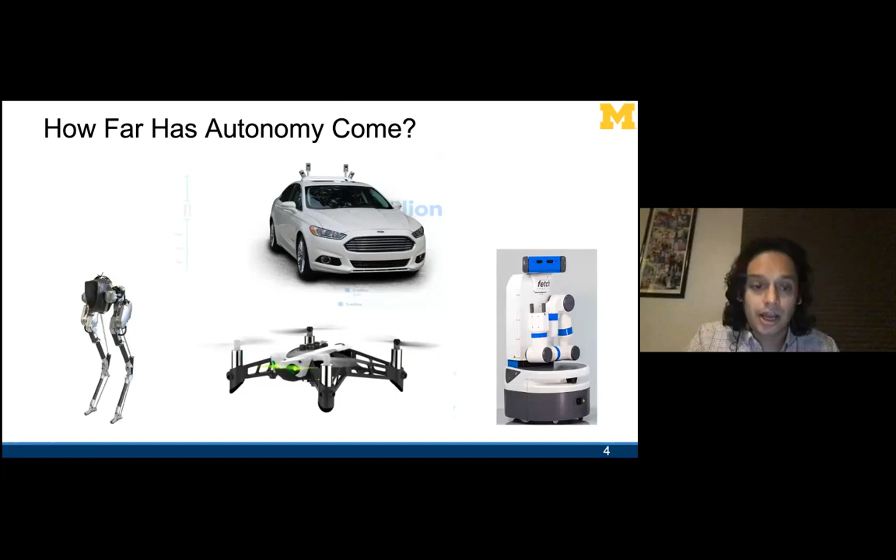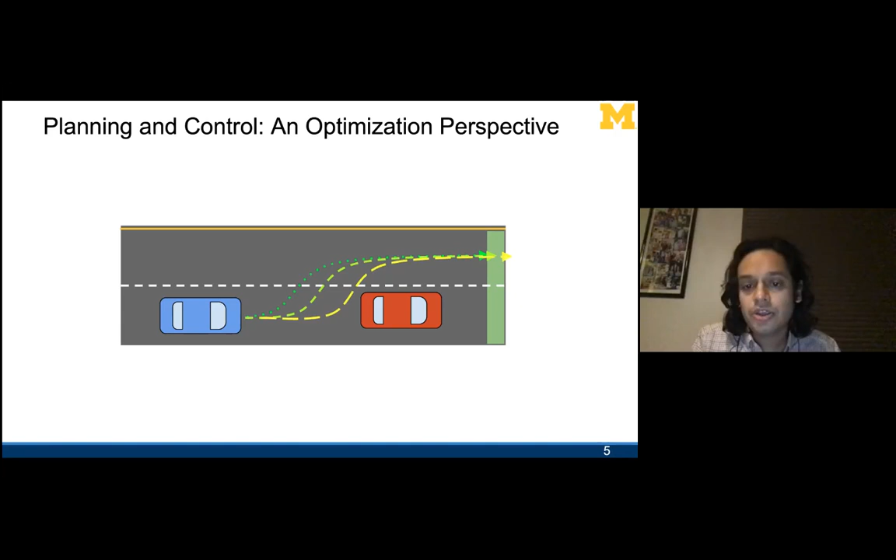The problem is that in order to make them work quickly, we tend to discretize time pretty coarsely. The question always is, if the coarseness is refined and we make it a finer and finer trajectory, does it get actually closer to something that is actually unsafe? The question then is, there's sort of a balance between getting something that is able to operate in real time and something that is actually provably safe.

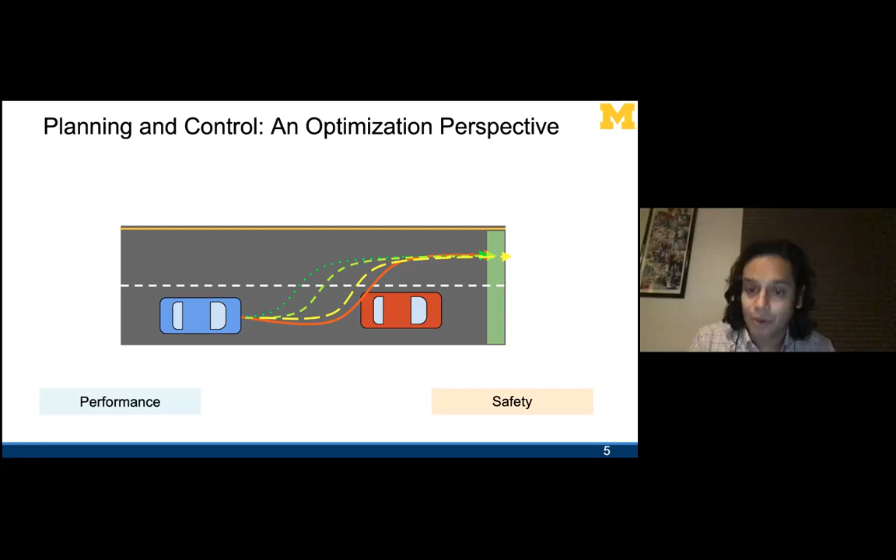The question here is, how do we balance between these two types of problems: getting something that can operate quickly, and at the same time, something that is validated to operate correctly. The thing I'm really interested in is figuring out the right balance between these two.

One way to think about that is by looking at model fidelity, representing the problem you care about in a nice way. This can be a challenge using typical techniques where I have a nonlinear dynamical system and write down a nonlinear program. That program may have more and more decision variables, representing safety better and better, but that will slow down the performance of the system.

So instead, my group has been looking at techniques relying on infinite dimensional representations of this problem. The really cool thing is that infinite dimensional representation allows us to apply nice tools from convex optimization to balance between performance and safety by representing different types of model fidelity in interesting ways.

In the first portion of the talk, I should mention these infinite dimensional representations allow us to go from nonlinear models to linear ones. I'll talk about a technique my students developed called Reachability-based Trajectory Design. It's a certain type of lift of nonlinear models into a linear one, where we generate representations of these linear models that are outer approximations to the nonlinear model's behavior.

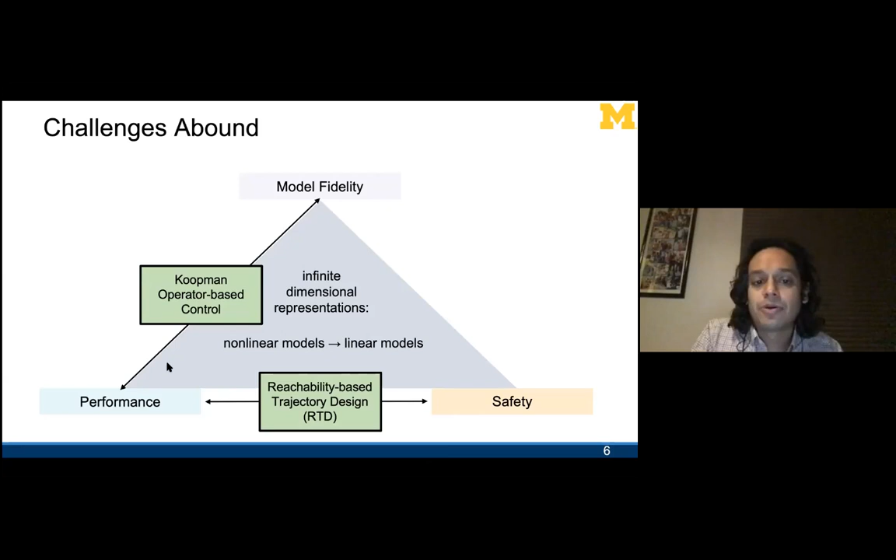That outer approximation allows us to say something about safety at runtime. In the second portion, I'll talk about doing data-driven optimization to generate something that looks like a Koopman operator representation—again a linear representation of a nonlinear dynamical system. The impressive thing is that nonlinear model, represented in a linear basis, allows us to apply traditional control techniques like model predictive control to real-time control of a soft robot.

I may not get to this part, I have a lot of slides. I apologize in advance, but I'll try to provide a high-level introduction to both of these topics.

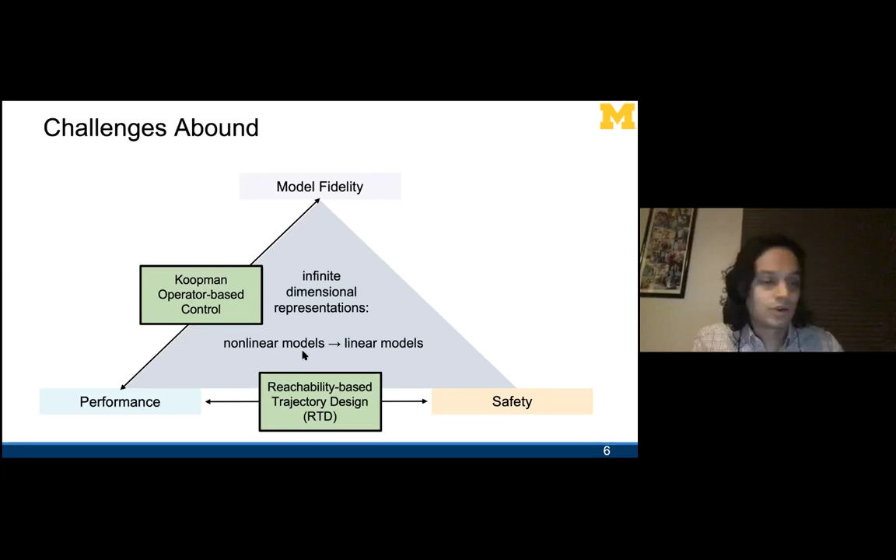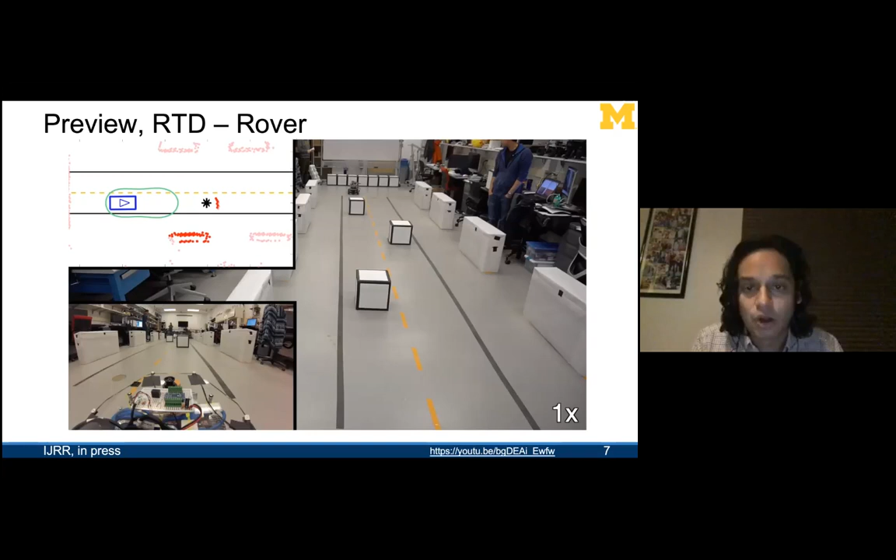We've applied this type of planning to a bunch of different systems, and I'm going to show you lots of videos of this working. This is RTD, Reachability-based Trajectory Design, applied on a rover. This is my lab, from when we used to have a lab.

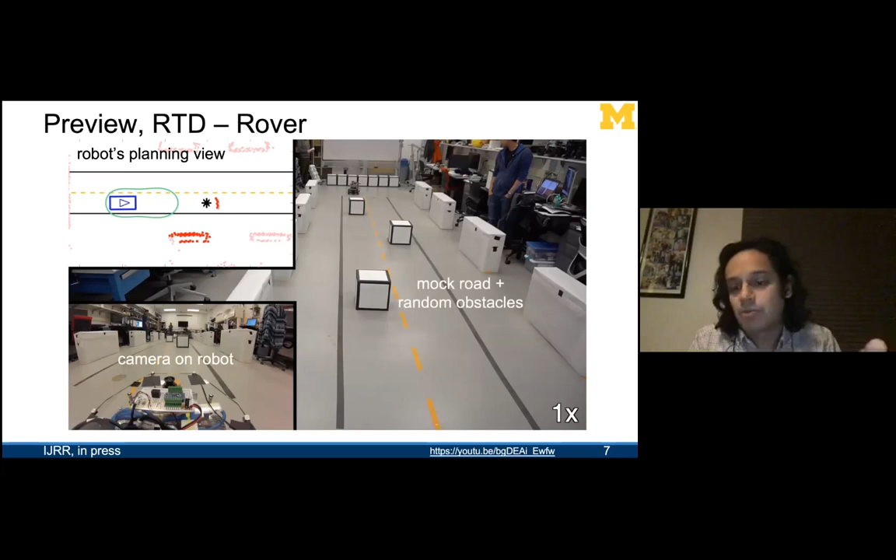These videos are always going to look sort of the same, so I'll walk through it carefully. We have this robot planning view, which you can imagine in Gazebo or MATLAB. We have a camera on the robot, a random world on the right-hand side, and a high-level planner generating waypoints. We have obstacles drawn in red, and our robot drawn in blue.

We'll have this control parameterized reachable set. I'm drawing a slice of the reachable set, meaning a particular trajectory or control I've applied and the corresponding reachable set of the system. Basically, the car selects different types of reachable sets it has pre-computed in order to do planning.

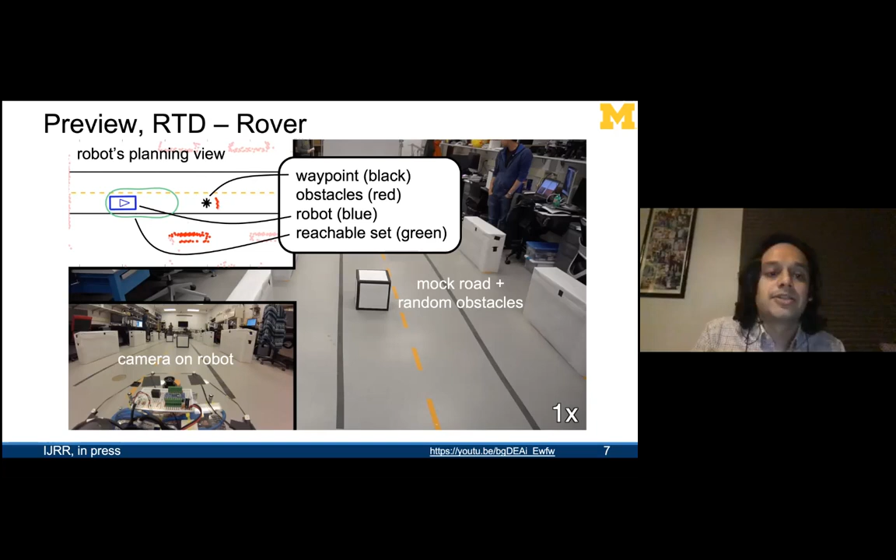This is actually drawn from a continuous space rather than a discrete space. So this is what it looks like now moving. This paper is now in IJRR—I think it was just published this year. You can find a video that I've shown here; the link will always be down here on the right-hand side if you want to take a look.

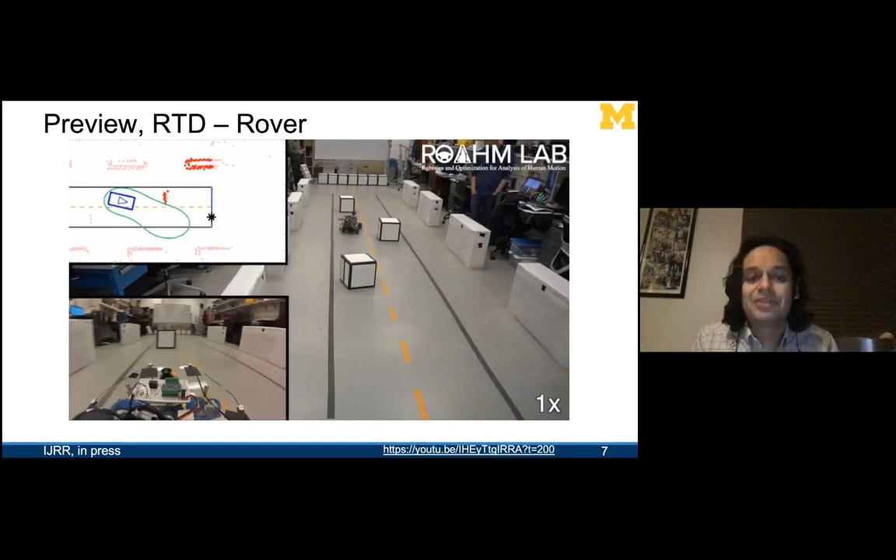They'll try to randomize it. All the compute is done onboard and it's able to operate safely. This tool is a simple example, but we've actually been able to apply it on a more realistic system.

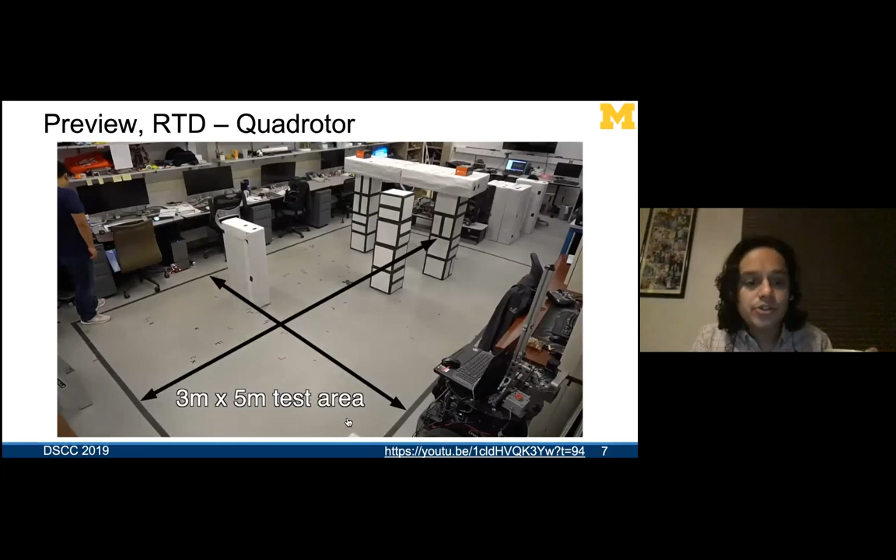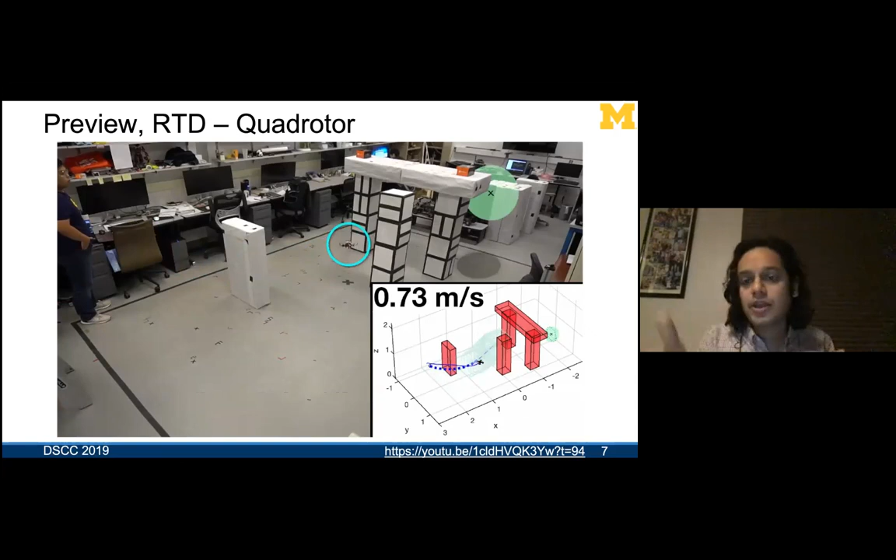Actually, that's not true. We've been able to extend it to quad rotors. This is another paper presented at DSCC, with the YouTube link down here. It's from our lab. It can't go very fast, but we have this quad rotor, and it's doing all the compute on board, able to get through complex environments. I'll jump ahead, and you'll see it going through more and more complex environments, dealing with some aerodynamic effects.

So it is truly dealing with the fact that I may have a nonlinear model. And you're going to see that it's able to operate with dynamic obstacles as well. We have a virtual obstacle here that's not depicted in the real world, and then a moving obstacle depicted with this rover.

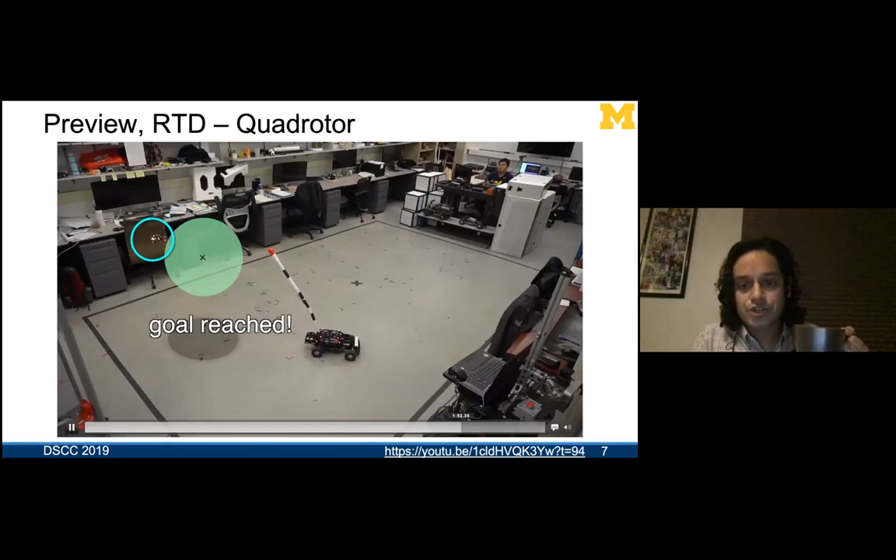All the compute is happening in real time. We're able to do more interesting things here with even people moving around in front of it. All the planning, all the reachable set construction in terms of selection of the reachable sets, is happening at runtime. You're going to see some fun stuff going on here.

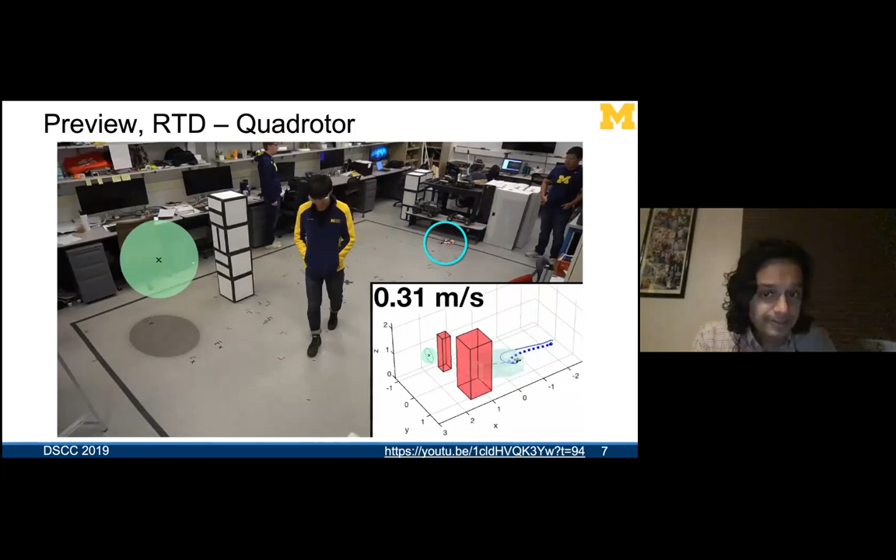We've been able to apply this to even more complex systems, like this manipulation robot. This is a 7DOF robot, so more or less a 14-dimensional nonlinear state space model. And again, it's doing all the planning at runtime.

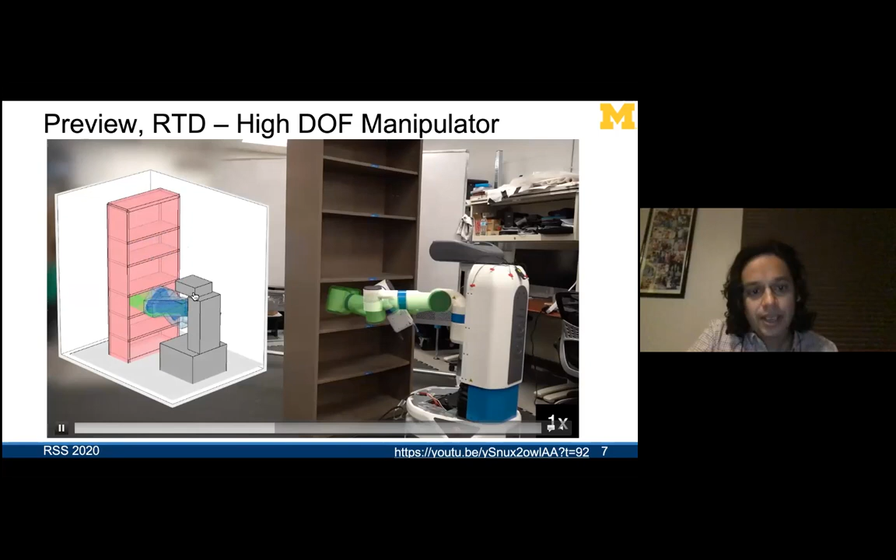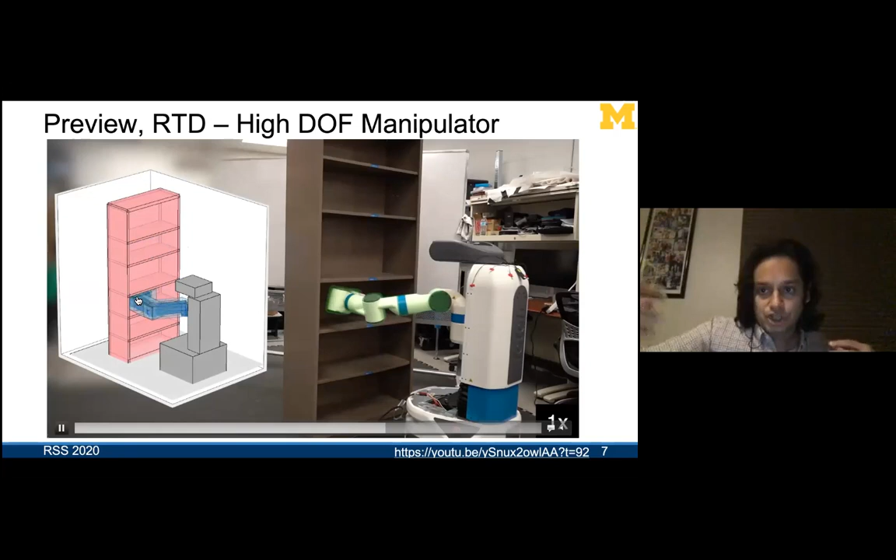The predictions here are drawing a reachable set, the volumetric box. Earlier on, the waypoints were drawn as black stars along the way. Now the waypoints are generated by an RRT, drawn as a black manipulator configuration description, which you can see up here as well. Then we have dynamic obstacles appearing, and it's doing all the planning, everything, at runtime.

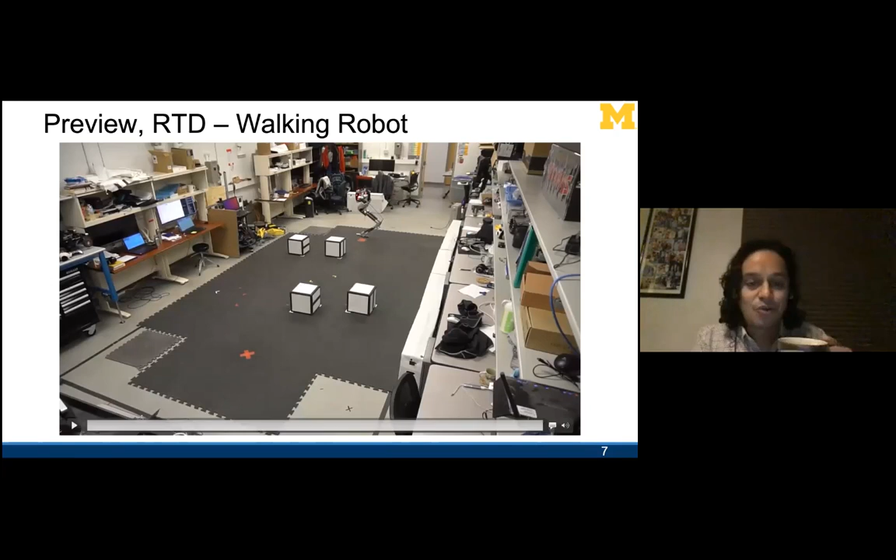We've actually been able to extend it to even more complicated systems, and this is Cassie. In this instance, we're constructing an even more complicated reachable set, and it's able to do planning at this point. This is right around when COVID was about to hit the United States, so this is where we got to before our lab had to shut down.

That's going to be the first portion of my talk. The second portion, I'll hopefully talk about Koopman-based control. Initial versions of this paper were presented at RSS and then TRO, and there's an extension that's up on arXiv at the moment.

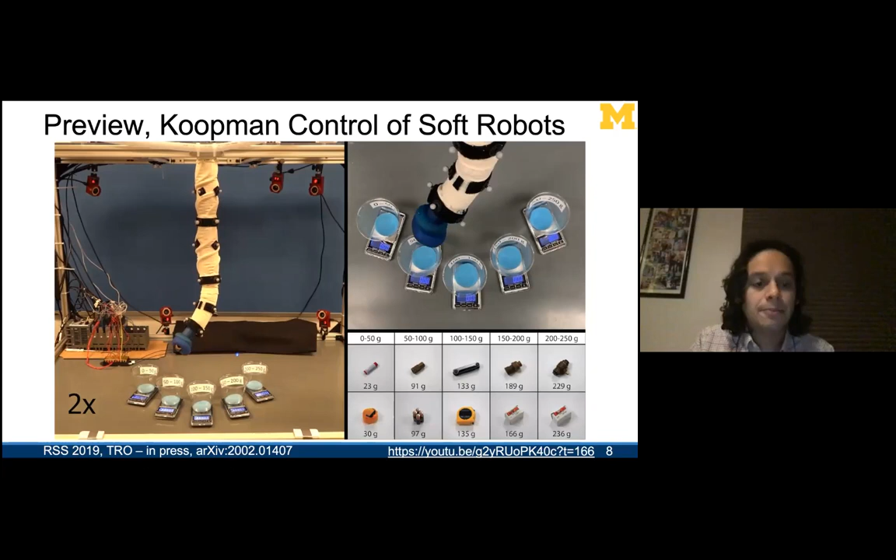What we're able to do is use a Koopman-based model, another kind of lifting technique, to basically do manipulation. This is an example of us building a data-driven model. It's able to pick up an object that's handed to it, figure out the weight of the object at the end effector, and place it into the right bin. All of this is happening in real time, figuring it all out on its own.

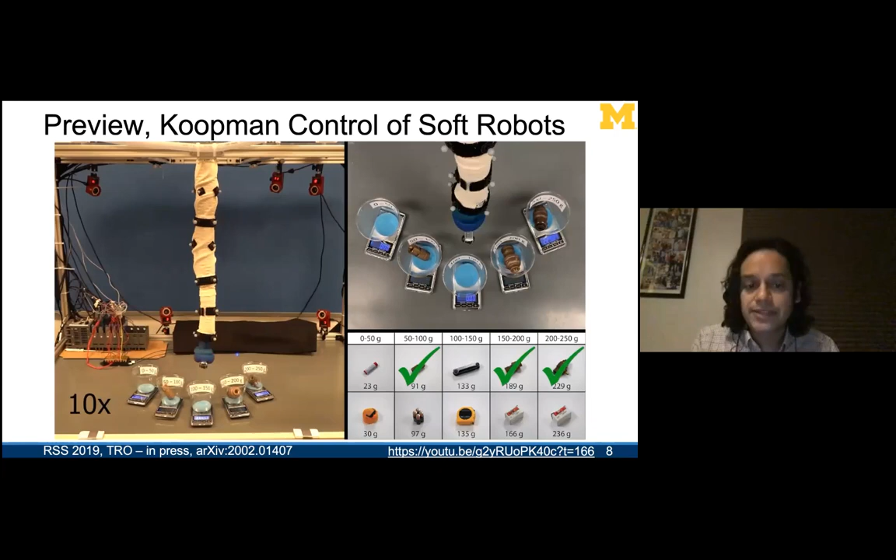These systems are notoriously difficult to model and subsequently difficult to control. But this lifting-based technique allows the application of linear-based control techniques, which lets us do quite a bit in terms of controlling these systems using a data-driven perspective.

I see a question. Let me take a quick look at that. Oh, never mind, I thought it was Jana's slide comment.

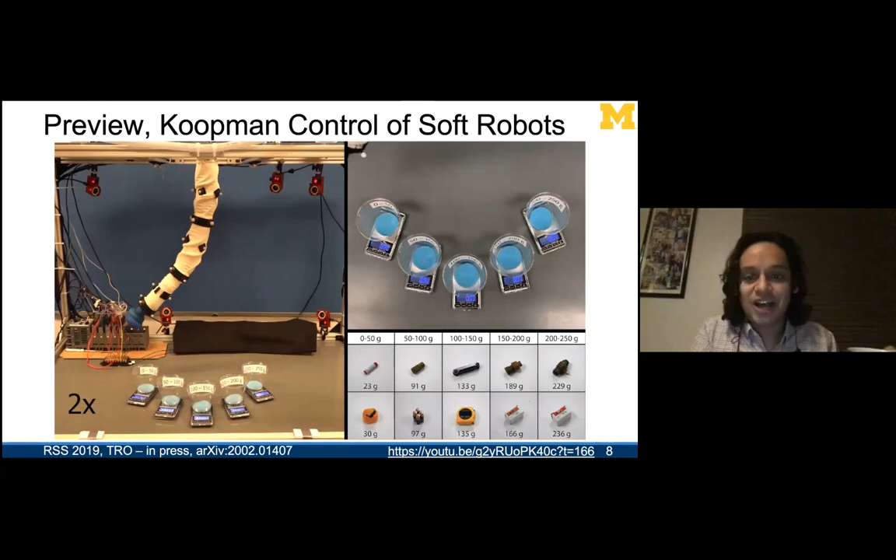Okay, great, so that's going to be my talk, more or less. I'm going to talk about reachability-based trajectory design for provably safe planning, and then I'll talk about Koopman-based modeling and real-time control.

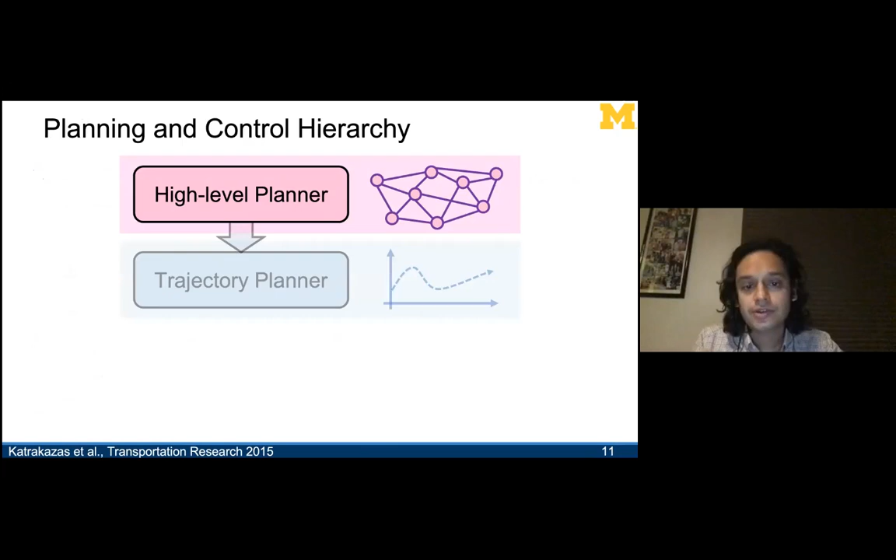Subsequently, that information is passed to a trajectory planner. What that trajectory planner tries to do is execute those turn-by-turn instructions. So what that means is, I may get information to go down to the end of the road, stop, and then make a right. How do I get down to the end of the road and then make that right? The trajectory planner is essentially deciding how to do that.

And then finally, I have a tracking controller that is trying to follow the trajectory that has been designed in the previous stage. This tracking controller has to manage the powertrain dynamics and a lot of other complications.

While doing trajectory planning, if I have the entire powertrain model in my hand, it turns out to be really challenging to do real-time planning. So you make a decision to abstract the model at some level and use a simplified model to generate a trajectory, and then cross your fingers and hope that a tracking controller can actually follow that trajectory that has been planned.

So for anyone working in the verification or validation community, that seems really problematic. The question is, how do we actually make some strong guarantees about the trajectory planner or the tracking controller behaving as desired?

Many people have thought about bringing in safety at this tracking controller layer, and that's a good idea. In fact, lots of folks have worked on that. So in my group, we've divided them into different bins.

The first bin of approaches to doing this validation of path planning are methods called check methods. What they try to do is look at some pre-computed trajectory and validate that that particular trajectory can be realized by the system in a safe way. There are a lot of methods to do this, and I'm not going to do a great job of covering all of them. If you're interested, please follow up with me, I can share millions of references about this.

But one particularly beautiful class of methods are these Zonotope methods by Chris's PhD advisor, Matthias Althoff. His group has done a really beautiful job of developing these methods to do collision checks at real time. These methods work by relying on linearizations of a nonlinear dynamical system and generating zonotopes around those linearized representations. That zonotope describes what can happen for this nonlinear system when it's treated as a linear system plus disturbance. These methods work really well when the system looks really linear.

So that's basically the trade that they make: if I can write down the dynamics as even a linear time varying system plus a small amount of disturbance, these methods shine.

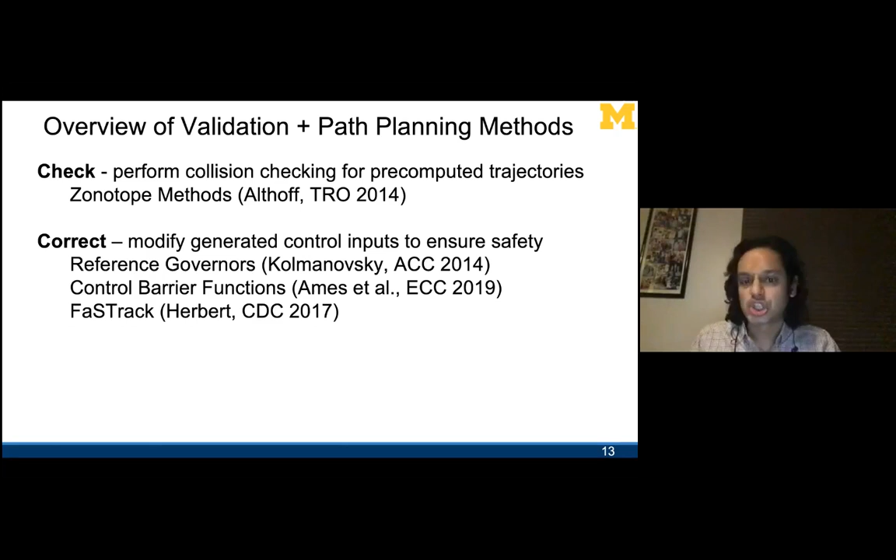So others have thought about bringing in safety at a slightly higher level, at this trajectory planner level. And in fact, there's been a bunch of different methods thinking about this. I'll highlight two of them.

One are these funnel library approaches, developed by Ani Majumdar and Russ Tedrake. So when I was a postdoc at MIT, Ani was working on this stuff. It's really cool. Basically, what they end up doing is selecting a finite number of possible trajectories and generating sums of squares representations for reachable sets around these finite pre-computed trajectories.

What we're going to do is basically generate a continuum of trajectories. And essentially what I'm going to show is how you can scale this method up to dealing with lots of more complicated high-dimensional systems, but also how do you deal with obstacle representations and actually make really strong guarantees about safety.

So that's the delta here between the funnel library approach, where they're really just focusing on ensuring safety at discrete time steps and using a discrete action space, and here we're going to focus on safety over all of time, so over a continuous amount of time. And we're actually going to have a continuous space of possible things that the planner is allowed to select from at runtime.

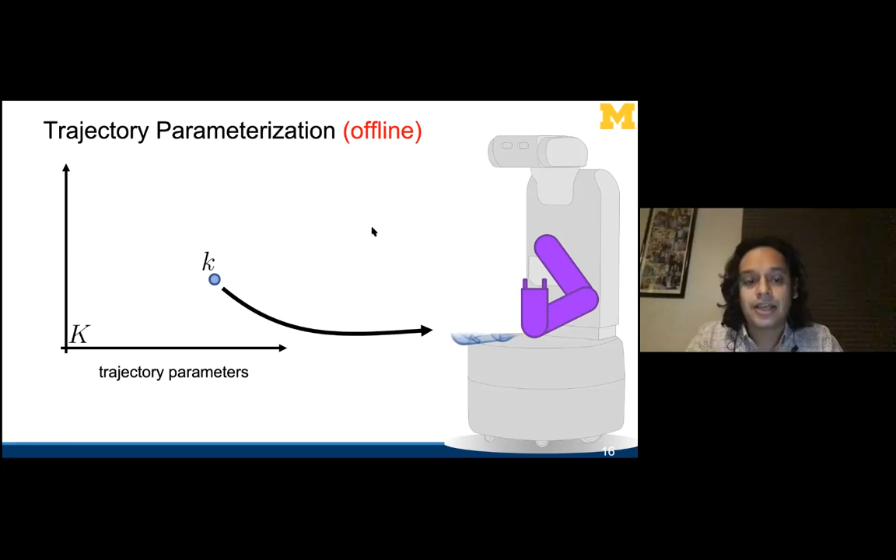Offline, what's going to end up happening is I'm going to select a trajectory parameter space. Each trajectory parameter is going to correspond to a behavior for the robot. And in fact, what I'm going to do offline is generate a reachable set for the system, and that's going to correspond to some sort of volume in the workspace of the robot.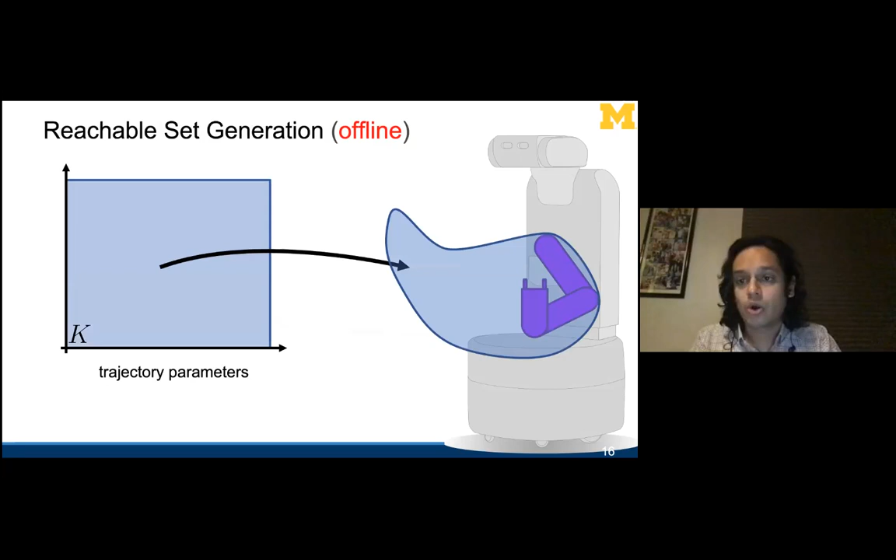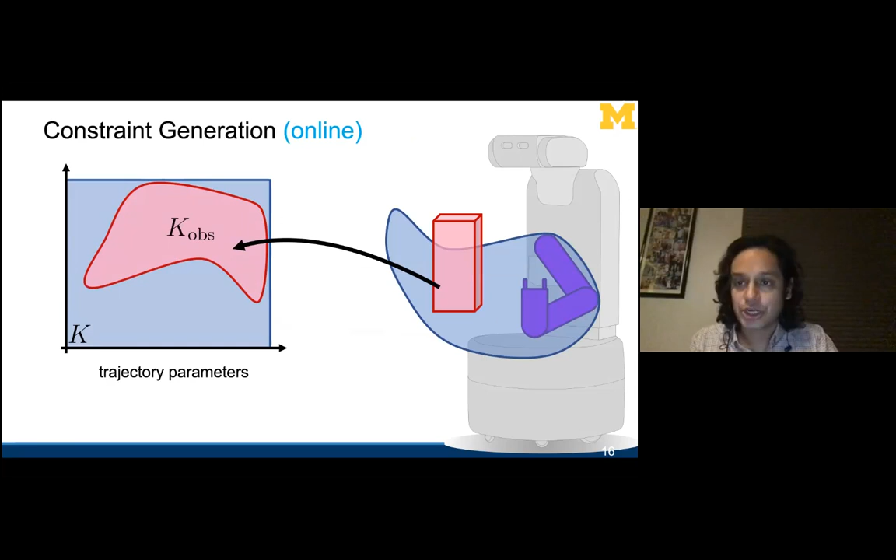And then what I'm going to have at runtime is basically constraints that are going to appear that are only known at runtime, and that's going to correspond to a set of unsafe trajectory parameters, right? And in fact, what I'm going to do is show that I can write down a trajectory optimization problem.

So suppose I have some sort of desired configuration I'd like the robot to get to. Well, that may correspond to a particular target trajectory parameter. Well, I can write that down as some sort of optimization problem here on the left-hand side.

And it's going to turn out that that optimization problem is fairly easy to write down with really nice constraint representations and really nice cost representation, which is going to allow for the application of really nice gradient descent methods that I'm going to be able to run really quickly at runtime. So that's basically what it's going to look like.

And then I can do optimization in whatever way I care to do it, and basically discover maybe the closest possible solution that I can find at a particular instance. But because of the way that I'm representing obstacles and the way that I'm representing this reachable set, I'm going to be able to show that any feasible solution to this optimization problem is actually safe. And because of the way I'm going to parameterize trajectories, I can always guarantee that I'll find a feasible solution.

Okay, so that's going to be the story I'll tell. The cool thing, at least, is that we have this sort of high degree reachability for a continuum and for high degree of freedom robots.

I'm going to show you how to represent obstacles to really ensure that you're generating something that is safe. That's going to be sort of at a high level what we're going to do. I'll walk through the theory here, and then I'll walk through the implementation.

So how's this going to work? Let's write down a model for the manipulator. Again, I'm focusing on manipulators here. The technique can extend, but I'm going to have a multi-dimensional robot here. I'm going to let QI denote the joint trajectory of a particular joint I.

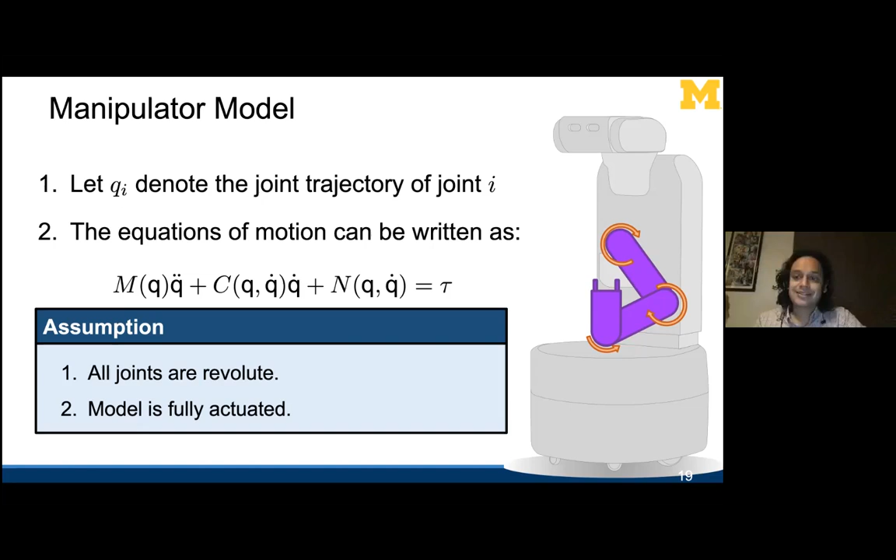Okay, so why do I care about this full actuation for this particular talk? Well, in fact, if the model is fully actuated and I can write down the equations of motion, well, if I assume that I don't have any actuation constraints, well, what I can do is, as long as I have a desired trajectory that matches up with my current trajectory or current joint velocity and joint position at time 0, well, I can track that desired trajectory perfectly as long as I use something like feedback linearization if my model is fully actuated, and I can write down the equations of motion.

So again, if I have a desired trajectory and that initial velocity and initial position of that desired trajectory match up with my current position and current velocity just at time 0, well, then I can track that trajectory perfectly as long as I assume that my model is fully actuated, as long as I assume that I have no actuation constraints and I have a model of the system.

Okay, those are 3 really serious assumptions, but we'll start there, and then I'll show you by the end of the talk how to extend or remove most of these except sort of this fully actuated requirement.

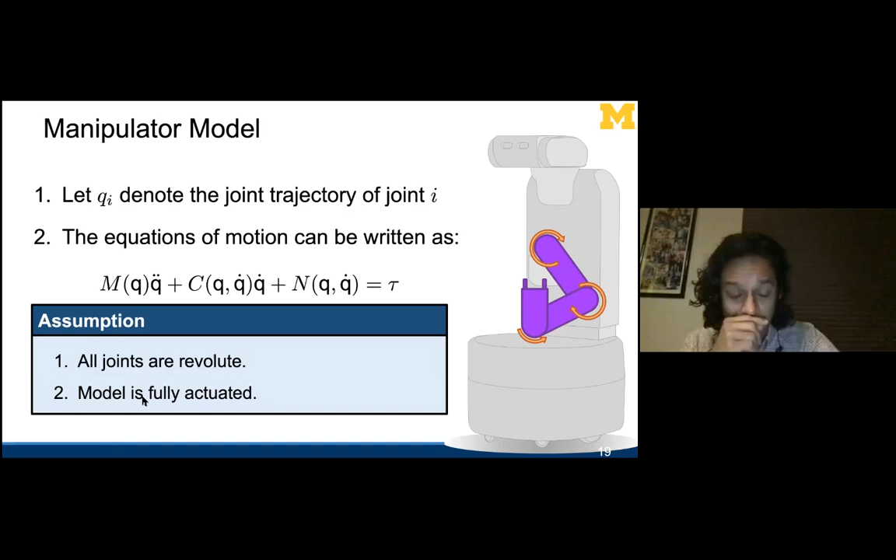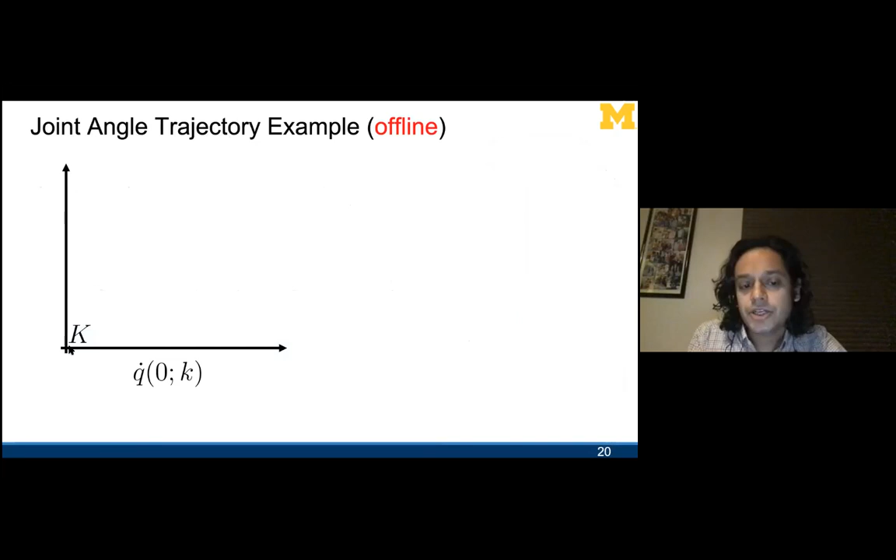So what we're going to do first is parameterize trajectories, as I mentioned. I'm going to give you an example of how this trajectory parameterization is going to look. So the way that it's going to work is, I have this trajectory parameter space K. I'm going to assume, and this is an assumption, that one of the trajectory parameters is going to correspond to the initial velocity of my system. And then the rest of the trajectory parameters can correspond to anything.

I'm going to select something that looks like Q double dot desired. In fact, it could be anything that you wanted it to be. But this particular choice of trajectory parameter is going to be required, and we'll see why in a moment.

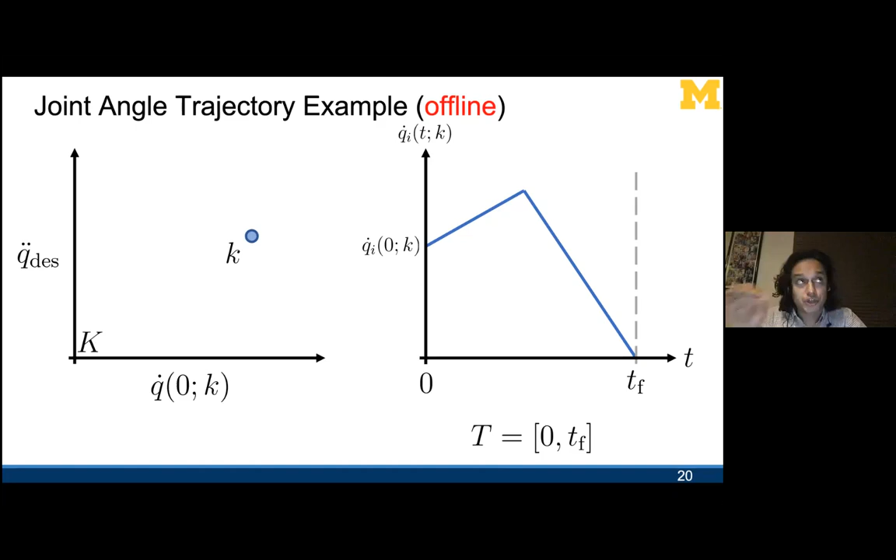Well, under this selection, what that would mean is that if I had a particular trajectory parameter, I'm going to first start off here, and this is going to be sort of the y-intercept of my trajectory parameterization, and then the velocity could be, or the acceleration could be something that looks like this. Well, what I'm going to assume is that this is defined over some tau plan or t plan, and then eventually my trajectory parameterization is going to bring my system to a stop.

Okay, so what I'm going to assume is that my robot must find a new plan within T plan, and otherwise it continues executing its previous plan, and my previous plan is always going to bring my system to a stop. And the other assumption is that this Q dot 0 is going to be one of my trajectory parameters, and we'll see why in a moment.

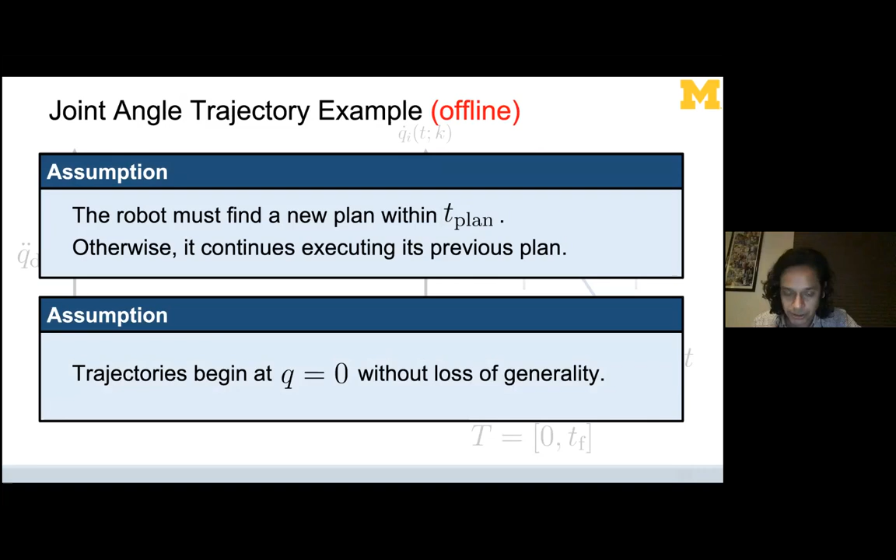And for the sake of simplicity, I'm going to assume that my trajectories always begin at q equals 0. I can always rotate my system around to make that assumption satisfied without any difficulty. So what I'm going to do is I'm going to apply a lift. As I mentioned, we're going to use infinite dimensional optimization. This is going to be the first example of a lift that I'm going to apply.

The lift is basically this: I'm going to take my trajectory parameter, and instead of just plotting my trajectory parameters here, I'm going to plot the sine and cosine of my trajectory over time. So if I give you a particular trajectory parameter on the left-hand side, taking the sine and cosine of that corresponds to some sort of trajectory on the circle on the right-hand side.

So why is that useful? Well, now if I give you a set of possible trajectory parameters, that corresponds to a set of possible trajectories on this circle for this particular joint. And what I'm going to try to do is compute the reachable set for this system.

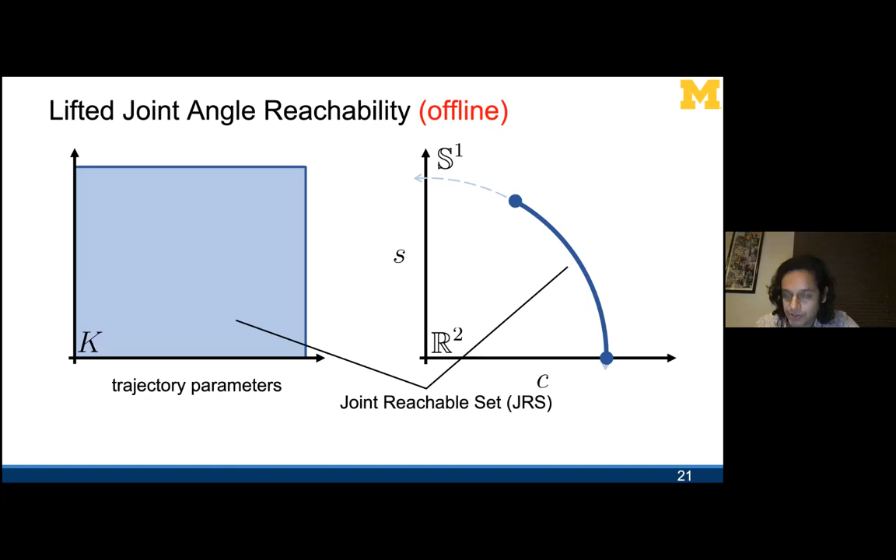I'm going to call this sine and cosine just S and C here, so I don't have to carry around too many variables. I'm going to compute a joint reachable set for this system, denoted with the script J, belonging to some subset of R2 cross K. Technically this should be on S1, but I'll pretend for a moment that S1 is a subset of R2, as depicted on the right-hand side.

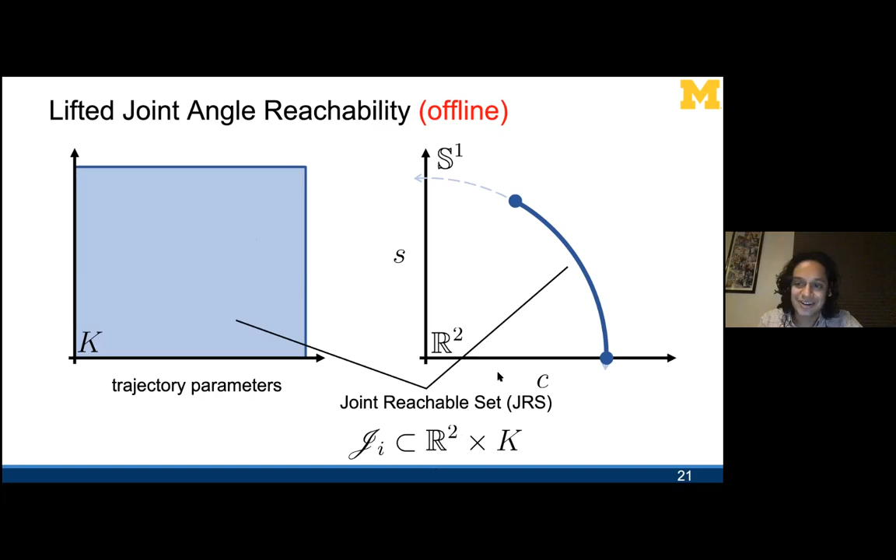So I'm going to try to compute this joint reachable set, defined as there existing a T such that I can write down this equation, and it satisfies the dynamics I had written down on the previous slide. The interesting thing is if I look at the dynamics of the system, I can write it down as a linear time varying system. Because it's a linear time varying system, I get lots of interesting reachable set tools that allow me to compute this joint reachable set in a really accurate way. We'll talk about that in the implementation section.

This lift, which looks mild and not very complicated, is allowing me to essentially extract a linear time varying system representation for the trajectory parameters in this C, S, and K space. In that instance, I'll be able to apply really nice tools to compute the reachable set of the system without any problems associated with nonlinear dynamics. So by translating the dynamics from the Q space into this cosine and sine space, I've applied a really simple nonlinear lifting technique, and that technique is allowing me to do really nice things with respect to reachable set computation.

So how am I going to use that? That works for one joint. How do I use that at runtime for multiple joints? The idea is simple: I'm going to compute a reachable set for each of the joints separately, and then somehow compose them together at runtime.

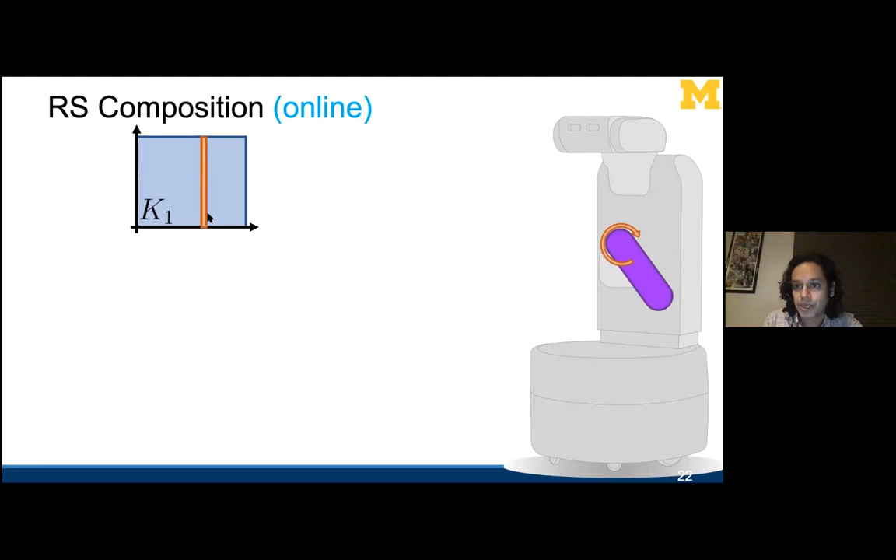In order for that to work, I'm going to do an operation I'll call slicing, which is I'm going to take my system at this instance in time and take its joint velocity at this instance in time, and plug that in. What that's going to do is select a slice of the trajectory parameter space, corresponding to a reachable set along this slice of the system.

Then I'm going to take the next joint of the system and do the same operation, selecting a subset of the trajectory parameter space corresponding to the current joint velocity. That generates a reachable set for the system as well. I'll do the same thing for the next joint. What I'll do at runtime is compose those slices together by doing some sort of multiplication on the reachable set.

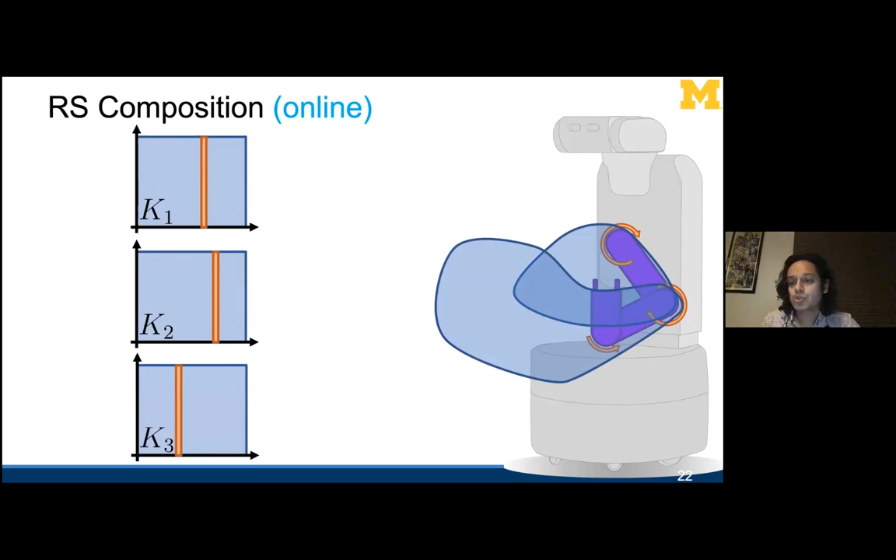This operation is going to be called slicing, where I'm basically slicing in the current velocity at time 0 of my planning. Then I'm going to stack the reachable sets together, and I'll call that operation stacking. The question is, how do I do slicing and stacking in a way that allows me to do nice things with respect to reachable set computation?

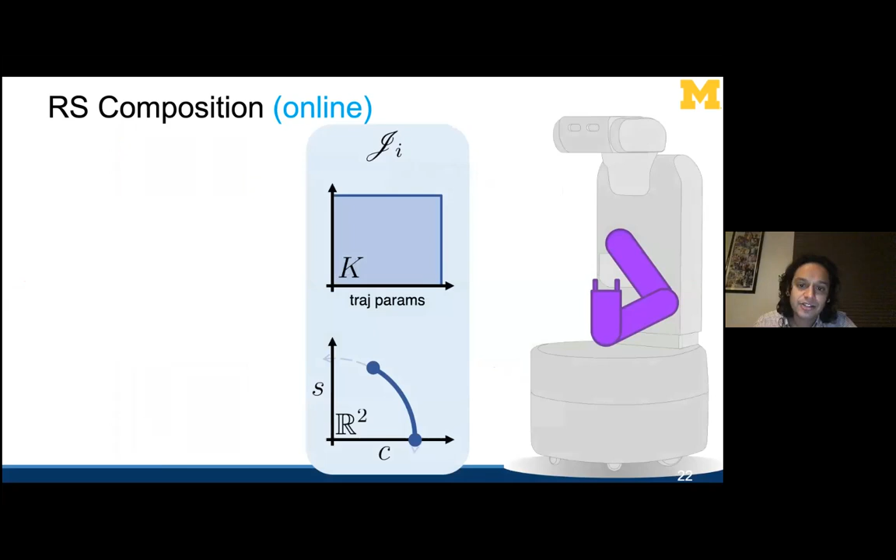That's basically the story here. Slicing and stacking simple reachable sets for each joint individually will allow me to construct a high dimensional reachable set of the entire arm. So how does that work? Again, I slice.

Okay, that particular slice I can represent as a rotation matrix over here on the left-hand side. Each slice here is going to generate a reachable set for the system, which is going to generate a sine and cosine as a function of time.

Once I do that, I'm going to get a rotation matrix as a function of time. I can take that rotation matrix, slice in, and take the link volume. If I multiply that rotation matrix as a function of time times the volume, I'm getting the link volume as a function of time under that particular slice.

I can do that with each joint. For example, I can do this with just the joint here. I'm assuming that the rotation matrices look a certain way because my revolute joint is organized in a certain way. I can again construct the manipulator volume by doing this type of operation. But now what's wrong here is that I haven't described the origin of the second manipulator.

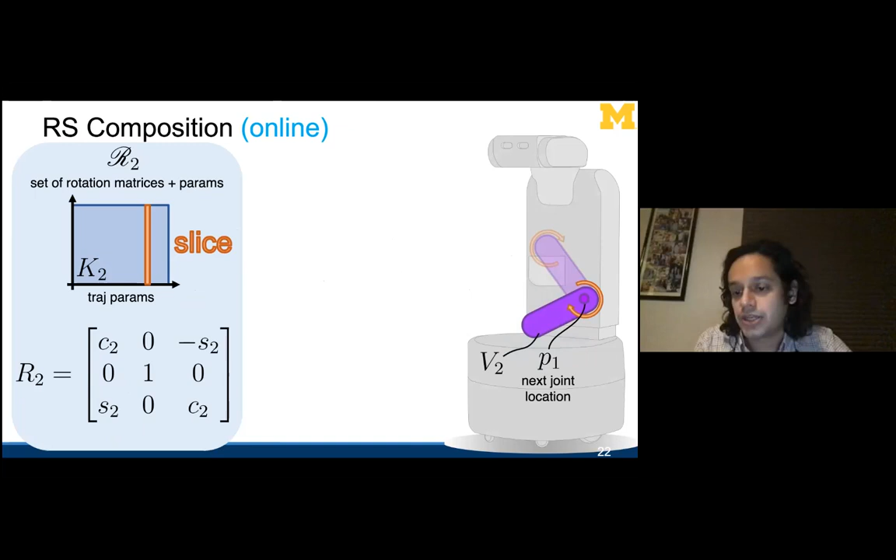So what I need to do is include the translation and rotation of the first joint. That's easy to incorporate because I can predict what the next joint location is by looking at the previous joint's link volume. So if I can compute R1, P1 as a function of time, I can add that into the link volume of V2 by doing this operation. That'll give me the parameterized swept volume of the second link.

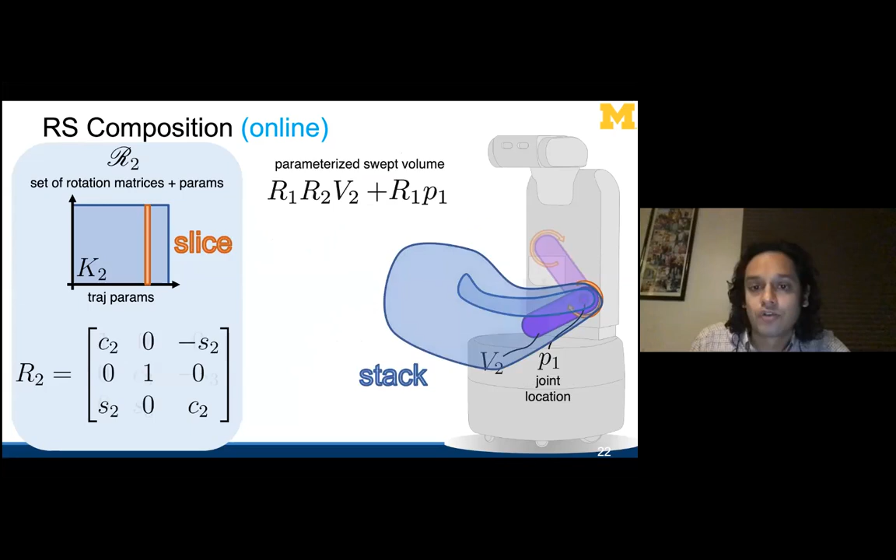And that's what I'm calling stacking. You can repeat this operation over and over. I can generate the stack for the next instance in time by adding up the effect of the origin, or the end effector, of the second link. I can do this type of stacking operation at runtime to account for the initial joint angles and velocities of the system, and generate a parameterized representation of the volumes of the system.

In practice, that's going to allow us to construct a parameterized reachable set of the arm at runtime, and we can use that to describe the trajectory optimization problem using really nice hard constraints. What do I mean by that?

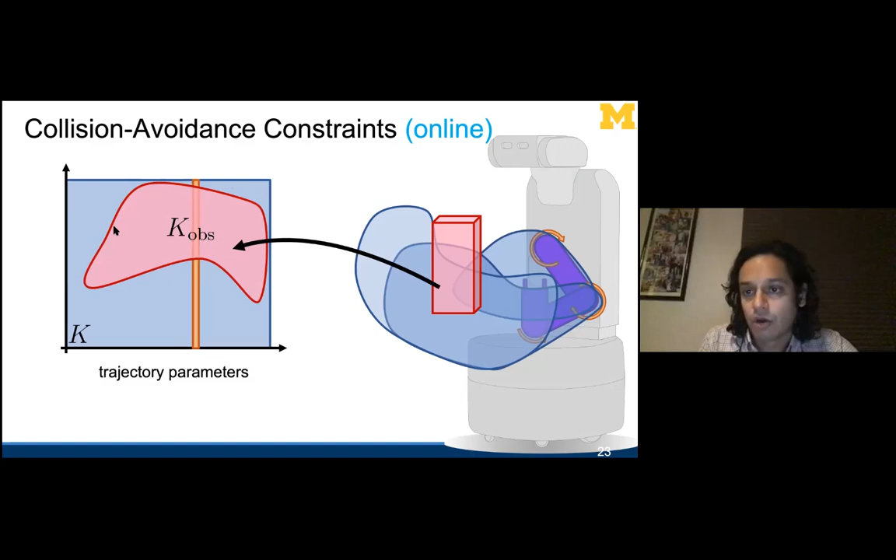Suppose I had this box over here on the right-hand side that is an obstacle I can only see at runtime. Suppose I do this type of slicing operation. What I'm going to do is generate this volume here on the left-hand side of what the arm is capable of doing. Now I can project my obstacle over on the left-hand side, and that's going to correspond to some trajectory parameters that are unsafe for the system.

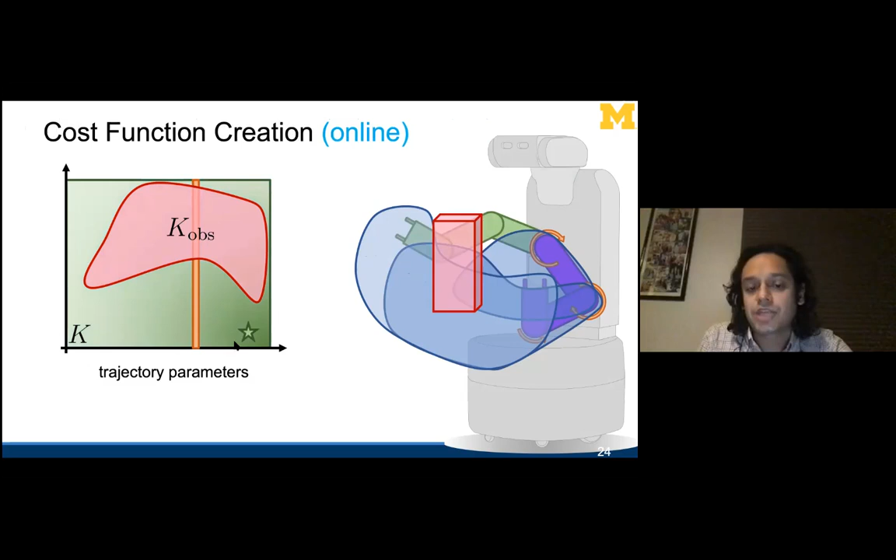Now what I can do online is, if I have some desired configuration, I can write that down as the following optimization problem with some cost that is minimized if I get to this particular configuration. I'm going to show that we can optimize over this safe space in a really nice way, so I can run gradient descent or something to detect what the safe trajectories are, or what the optimal safe trajectory here is.

So that's the theory of it, slicing and stacking. The question is, how do you compute these reachable sets? This is a nice theory, but how do we actually implement it? How do we implement stacking and slicing? It's going to depend so much on how these reachable sets look. And then the question is, how do we generate these hard constraints? Those are the three big questions, and I'm going to answer all of them in this implementation section.

The way we're going to do that, because our system, as I mentioned, when transferred into the sine and cosine space, looks like a linear time varying system. There are really nice tools to generate reachable sets for linear time varying systems. The zonotope methods I was describing earlier, coming out of Matthias Althoff's group, which Chris has played around with quite a bit, allow us to generate reachable sets in a really nice way for linear time varying systems, as long as they're represented as zonotopes.

So how is this going to work? I'm going to define what a zonotope is. It's going to have a center, and it's going to have generators. These generators are basically going to describe ranges that the zonotope is defined over.

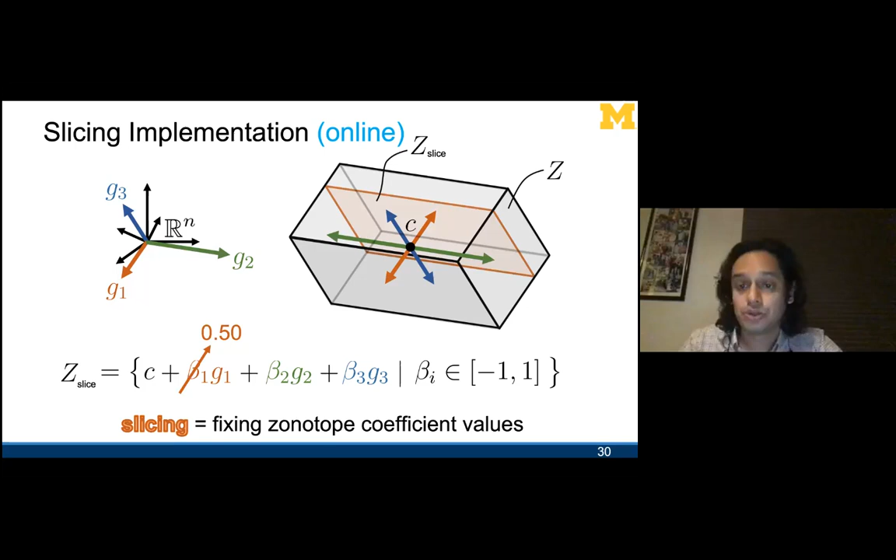Interestingly, I can slice in trajectory parameters at runtime. So if I have a particular initial velocity of the system, I can slice that in at runtime to be able to generate a subset of this zonotope. How does that work? What the slicing operation corresponds to is me fixing a particular zonotope coefficient value to some number. In this instance, I may select it to be 0.50. When I do that, I'm generating a subset of the zonotope here on the right-hand side. That zonotope slice is something I can then use at runtime - it's just some subset of the zonotope that I can use in a nice way, as I'll show.

So what do I do? I'm going to slice, corresponding to my initial velocity, and that's going to generate some subset of the reachable set, the zonotope reachable set on the right-hand side. And in fact, what I can do now is basically transform that slice into a matrix. Remember, it's generating the sine and cosine values over time. Well, I can transform that into some sort of matrix.

And in fact, the thing I'll need in order to understand how that looks is to define something called the matrix zonotope. It's the same thing - it's just now my center is a matrix and my generators are matrices. You can just think of this as the extension of everything to R n by n.

Nothing crazy happens here. So now if I want to understand how to do stacking, the idea is really simple. I have my volume of my first link - suppose I represent that as a zonotope as well. Well, then now what I can do is translate my joint reachable set into a set of rotation matrices. That's all I'm doing, basically taking these sines and cosines and turning them into the appropriate rotation matrix, which I'm going to denote by a capital M. So that joint reachable set is then translated into a matrix zonotope. And now all I need to do is multiply that matrix zonotope by the zonotope representing the link volume.

Essentially what I can show is that the matrix zonotope reachable set over-approximates the rotation matrix reachable set. And in fact, what that means in practice is that I can construct the link volume as a function of time for the first link.

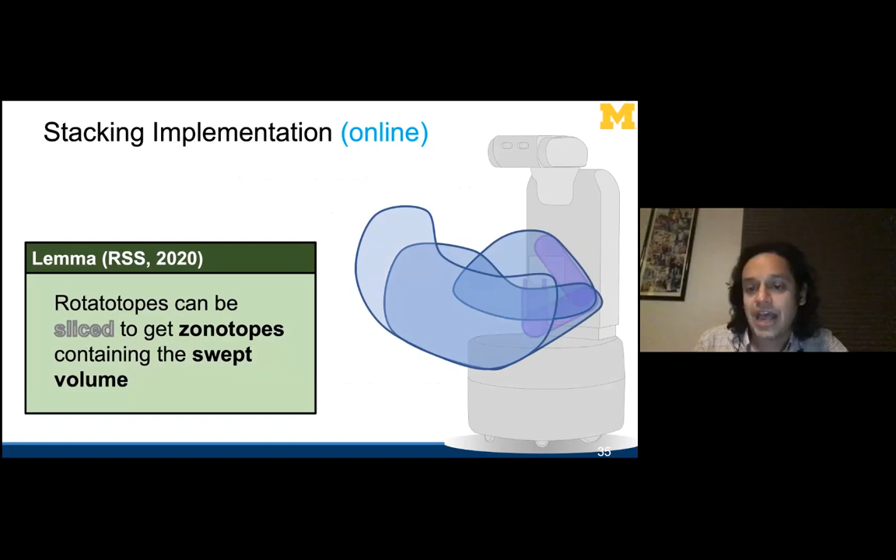Again, my students like naming things very sillily. They call these objects rotatotopes, because who wouldn't? We can keep doing this sort of operation, and essentially these rotatotopes can be sliced to get the zonotopes containing the swept volume. In fact, we have a representation of the swept volume here, which is truly an outer approximation to the swept volume of the system.

So now we can slice a rotatotope to get a zonotope containing the swept volume for a particular value of k. It's going to look like this. I'm showing this just at a particular instance in time—you can do this for all time, but it would just be a chaotic looking object. So keeping things simple, the question now is: how do I intersect an obstacle with this sliced rotatotope?

The thing here is that zonotope intersection is a really nice operation, and that's what allows us to do nice things. If I represent my obstacles as zonotopes—and I can conservatively represent my obstacles as zonotopes, may have lots of them—this doesn't mean my obstacles have to be convex. In fact, they can be any shape, and I would just be representing them with a set of zonotopes in that instance.

Now if I want to determine if these two zonotopes intersect with one another, that corresponds to checking that the center of one is inside of this new zonotope constructed by taking the generators of the first zonotope and essentially adding or appending it to the second zonotope's representation. In fact, I can represent this operation using a Minkowski sum. Okay, this is a lot of math.

Let's take a look at what it looks like pictorially. If I call this my first zonotope and this my second zonotope, what I'm essentially doing is taking the generators of the first zonotope and adding them to the second zonotope, then basically checking to see if the center is inside of this new, larger looking set. That's a nice operation for me to write down, as it'll turn out. So I'm basically determining if this guy can be inside of this guy.

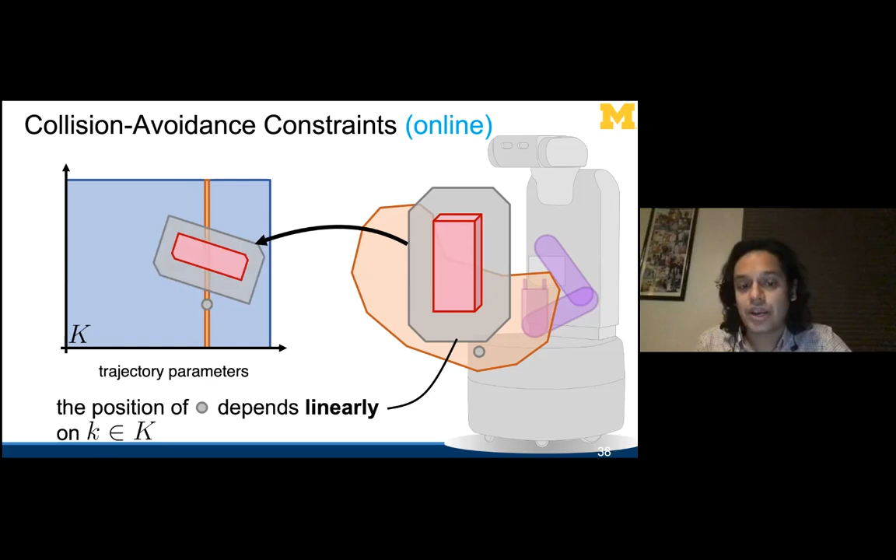And in fact, that operation looks like this. I'm basically checking that the generators of a particular link volume do not vary with K, and it'll turn out that the position of the center depends only linearly on K. This is a theorem that's inside of our RSS paper. What that means in practice is that I can write down this constraint in a nice, very linear-ish looking way.

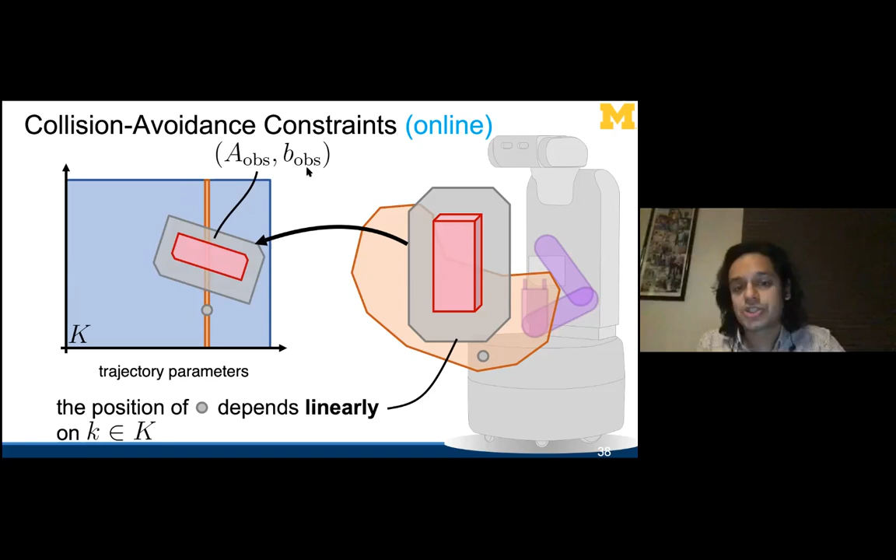So in fact, I can represent this obstacle as the following in A_obs and B_obs, which is sort of a linear representation for the obstacle. And in practice, I can write down the collision avoidance as a max over a set of linear constraints. So essentially, if the max over a set of linear constraints is greater than 0, then K is safe. And what that means in practice is that this optimization problem is going to look like this, which allows us to use really nice subgradient techniques to write down a derivative for this.

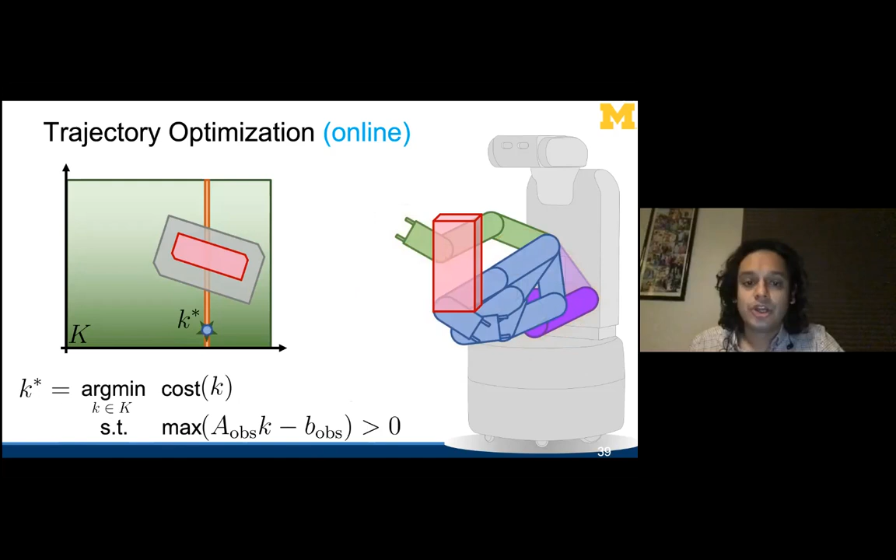And in fact, all of this optimization can be done in a really nice way, meaning gradients and everything can be handled. It's not linear, or it's not a convex program, but it's as close as you can probably get without being convex in this instance. That allows us to write down a really nice optimization problem that we can solve at runtime. Self-intersection, joint limits, and actuation constraints can all be written down in a similar way. And you can show that if you find a feasible solution to this optimization problem, the robot will not crash.

And if you plan in a receding horizon way, where if you don't find a feasible solution, you continue to apply the solution you computed that was safe in the previous instance in time, you can show that the robot will always stay persistently feasible and will always stay safe.

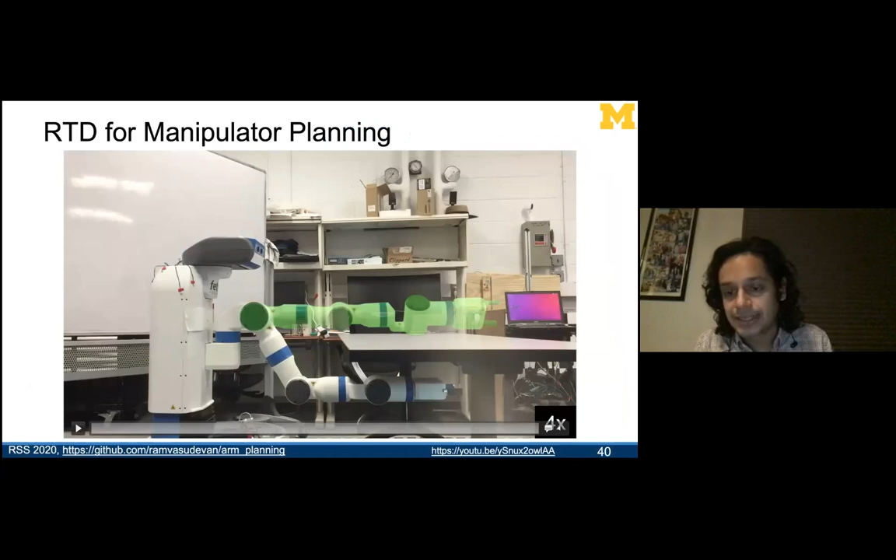So what does this look like? Here's a challenging situation for most robot manipulation: a really thin obstacle. And in this instance, we have a target configuration that we'd like to get to up here. And you can show really nice things happening.

I should pause this video here. You'll see the reachable set of the system. The trajectory parameterized reachable set is drawn in black around the current configuration, which is blue. You'll see this light black thing over here—that's actually the waypoint generated by an RRT, which we're trying to track.

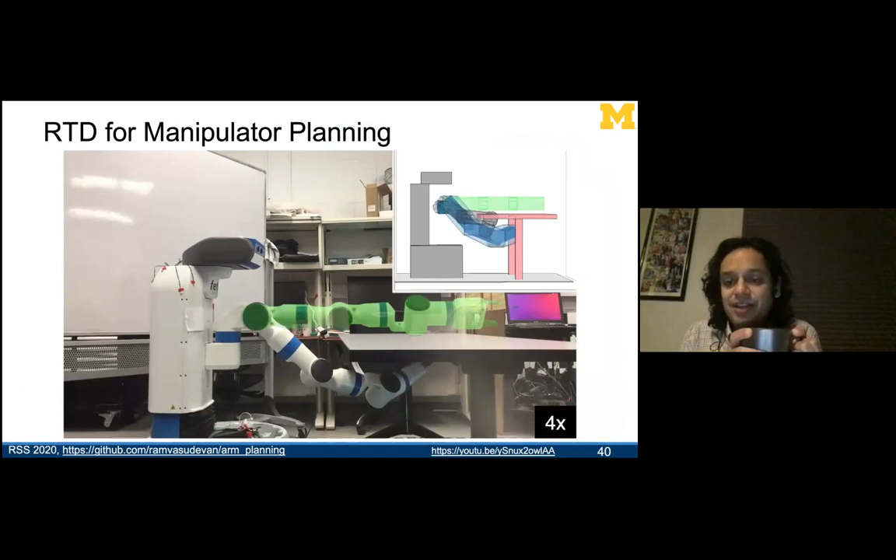And the goal configuration here is in green. Okay, so you can see sometimes this black waypoint is in collision, right? But nevertheless, our robot is always able to find a safe solution. Okay, so you'll see slowly it's able to get to the top. It takes a second here, but it can do it. So the waypoints we're generating in this instance are not particularly good, but nevertheless we're able to generate a safe trajectory. It's all done at runtime.

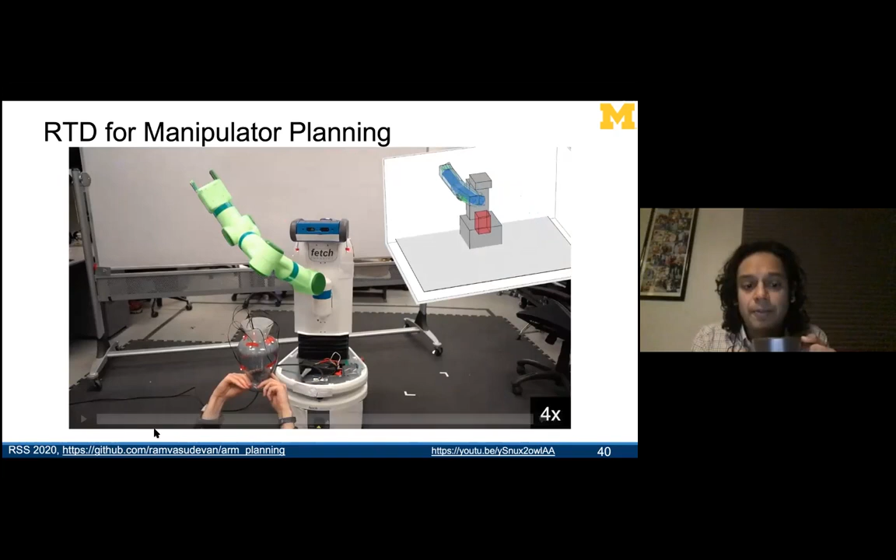The cool thing here is we can do this for dynamic obstacles as well. So for example, if this fancy vase pops up, we can actually, because we're planning in real time, avoid it in a nice way. All the code that we've developed is down here, so if you want to click on that, play around with it, and let us know if things are broken.

I'll mention again, this method—I've just shown it for this manipulator case, but we've actually extended it to a bunch of different systems, and we've compared it to lots of different systems.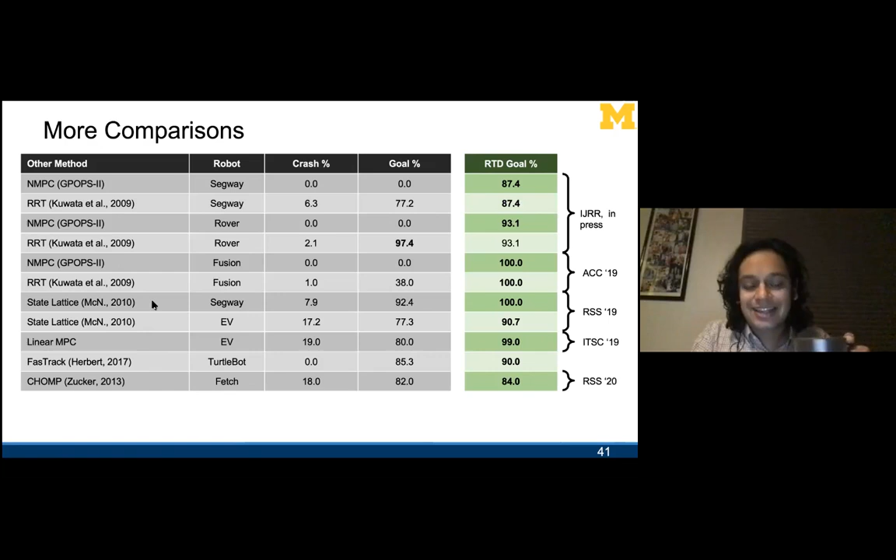And so the thing we want to show here is that we're not conservative. We generate these really tight reachable sets that allow us to plan without introducing additional conservativeness into the system. We've done lots of comparisons to lots of different systems—for example, we've even compared to FasTrack and CHOMP, which are other methods that exist out there. We've done comparisons to state lattice methods, linear MPC methods, all sorts of stuff.

Sort of the only place where we've lost in terms of being less conservative is this RRT method using a rover. This is actually using an old technique for reachable set construction, so we're probably a little bit better now, but I will point out that they have crashes, which is a serious problem for them.

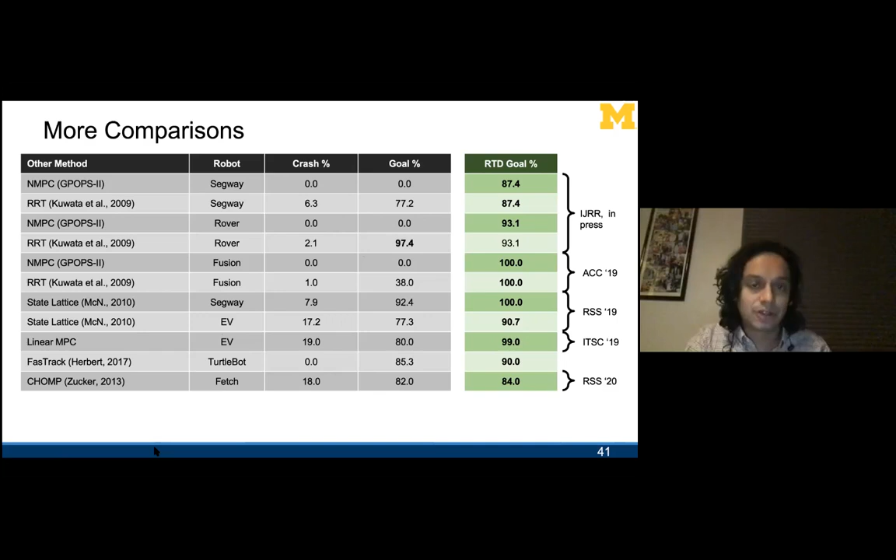And as I mentioned, we've actually been able to apply this—I think this is up to date from last year—we've been able to apply this to a lot more systems as well. I'll pause here for a second.

Jana, you guys only go until 3:50, right? We go till 4. Okay, and that includes questions and answers. Okay, well, maybe I'll pause here for a second and take questions. If I don't cover this Koopman-based stuff, it's totally fine. So if anyone has any questions, happy to start answering them now. And if we have no questions, I'm happy to talk about this last part, but otherwise I'm happy to hold off if there are questions. That sounds great, I'm going to pause recording. Is it good for me to keep going?

Okay, great. So we're going to talk about this Koopman-based modeling. It's going to be short here. So the thing to keep in mind is soft robots are really difficult to model. They're difficult to model because they have continuous deformations, distributed actuation, and nonlinear material properties that are pretty challenging to describe in a concise way.

This is my student Dan—it's primarily his work. I'll show this funny video of him just to illustrate how difficult it is to control. So he's trying to do this by hand, and there are even funnier videos of him having the thing run into his face repeatedly. It's challenging to make these types of systems work well.

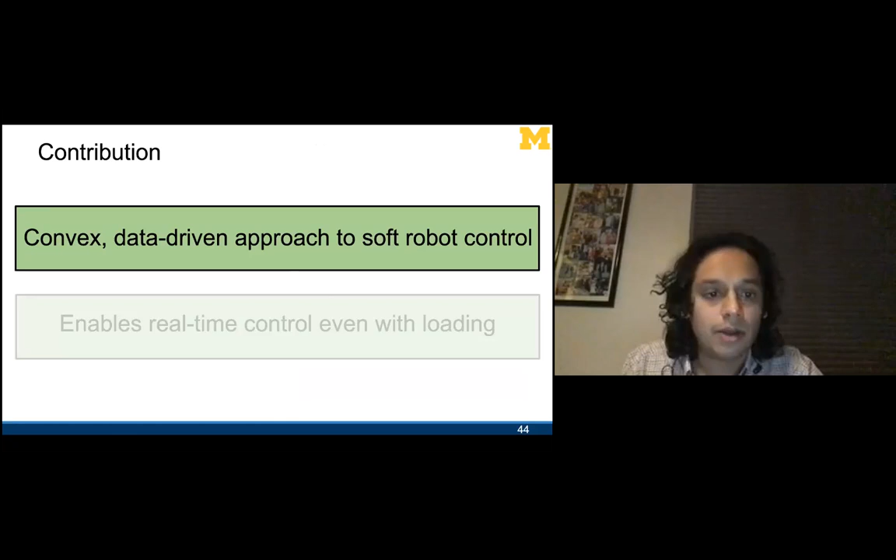So what we're going to try to do is develop a method that can do data-driven modeling of these types of systems, and in fact, that's going to allow us to do real-time control of these types of systems, even in the presence of loading.

The idea is actually going to be really similar to what I presented earlier. We're going to apply a lift. As I mentioned, we're going to allow this lift to be truly more representative of the system, rather than stopping the lift at just 2 basis functions. And the idea here is, many people have seen SVM classifiers maybe.

So like if I have an SVM, I have some data here. In linear SVM technique, I can write down the classification problem. For example, if I wanted to represent the red points here as 0 and the blue points here as 1, I can write down a linear program that generates a separating hyperplane separating the two pieces of data. That hyperplane allows me to write down a linear representation where everything on the left-hand side may be greater than 0 and everything on the right-hand side may be less than 0. Now, the challenge is, of course, when the data looks more complicated, lots of bad things start happening because I can't do anything nice here, except I can.

And the way that I can is by basically lifting the data here. This lift now translates the data into something where I can again apply a linear SVM. And so people typically call this the kernel trick, right? In fact, in a lot of ways, what I did in the first portion of the talk was like applying a kernel trick to allow me to compute the reachable set elegantly.

In practice, what we're going to try to do is the same thing with dynamics, which is trying to lift the dynamics so that things look linear. And I'm going to focus primarily on being able to do this in a way that allows me to apply linear MPC style techniques to control the system. So the way that it's going to look is the following.

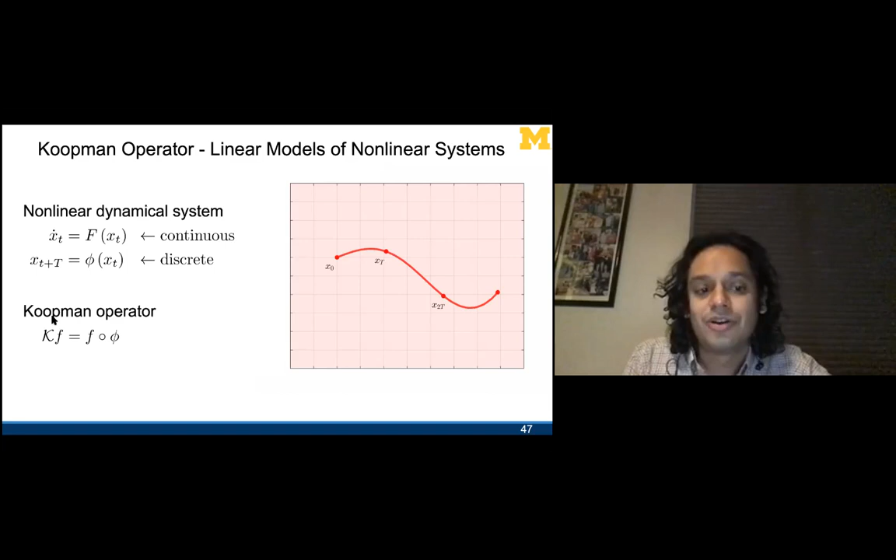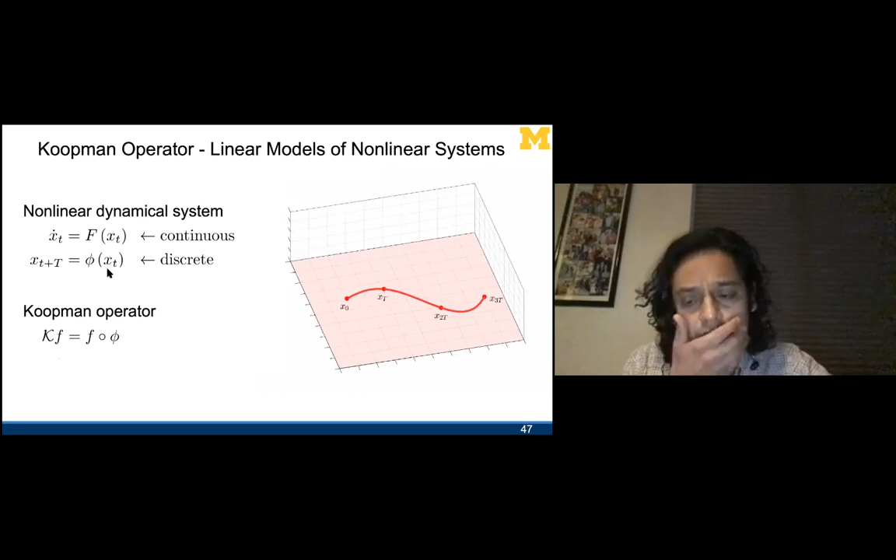And the way that it's going to be defined is the following: I'm going to take that function and compose it with this flow map that I defined. What that means in practice is I'm essentially taking my system that looks like this down here in finite dimensions, and I'm going to understand the behavior of the system on functions evaluated on the dynamics, or functions evaluated on the state space of the system. And so it's going to basically look like this.

And in fact, the great thing is that this representation of the nonlinear dynamics, by looking at its application on functions of the state space, is actually going to be linear, okay? It's going to describe or summarize the behavior of the nonlinear system. But the trade-off is everything is going to be infinite dimensional now rather than finite. So one way of thinking of this is I'm really taking that kernel trick that I described in the second portion of my talk and taking it to its extreme.

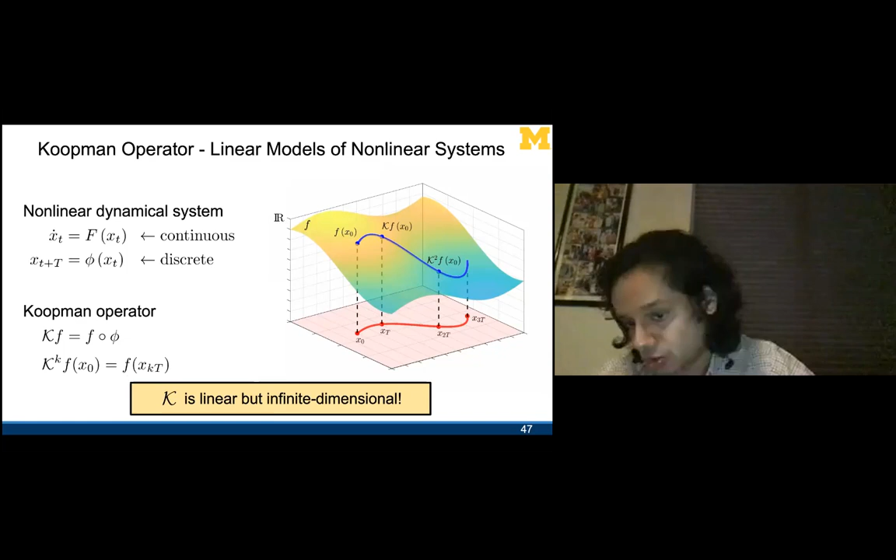Now, the challenge here is, how do I represent this object? The thing is, I can represent it by basically looking at a finite set of basis functions and describing the evaluation of this Koopman matrix on that finite basis function set. So one way to think of that is that I can have a representation of my function with respect to my basis function set.

So some arbitrary function, I can project it onto my basis function set, and that's going to generate some sort of vector representation of my function with respect to my basis function set. And in fact, I can think of the Koopman operator as if it acts on this projection of the function onto this basis function set. And so, that's this operator that we're going to generate.

The thing is, that operator may not necessarily allow me to, though it's linear, do optimization in a really nice way. So I'm going to think of applying this Koopman operator to some subset of all possible basis functions, where that subset is going to allow me to do nice things with respect to control.

Okay, so that's basically the idea of this section. I'll have my state space model collecting data. I'm going to translate that data by applying a lift, and I'm not going to consider arbitrary lifts of both the states and the control. I'm going to focus on lifts that look of the following form.

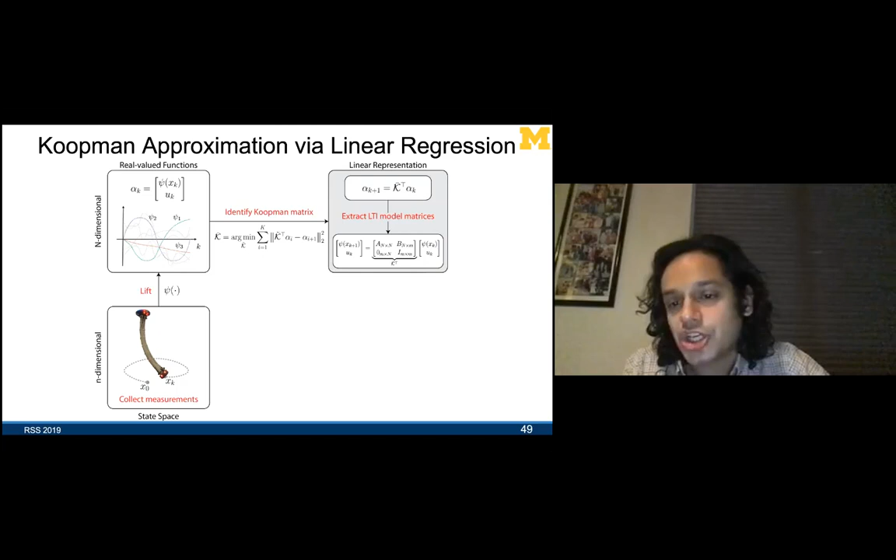I'm going to apply a lift on all of the state space, but not on the input space. What I'm going to do then is identify the Koopman operator, but just on this subset of basis functions. In practice, that means I'm going to try to identify a linear time invariant model matrix. Because I'm not lifting all of the input, but allowing the input to pass through without lifting, I'm able to extract a control matrix and a state matrix that are represented as LTI.

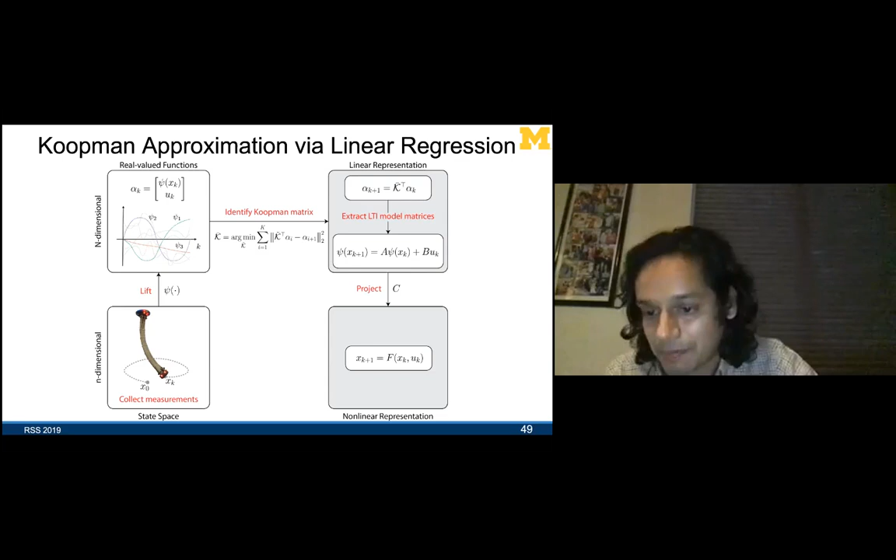That allows me to write down an LTI model representation for this nonlinear system. We can show that this allows us to do something like linear model predictive control. But the thing is, you can't prove that this representation is perfectly accurate like you can with the full Koopman matrix, because I'm not lifting everything, just a subset of functions. Nevertheless, this is good enough for us to actually control and model the soft robot, and that's what I care the most about in this section.

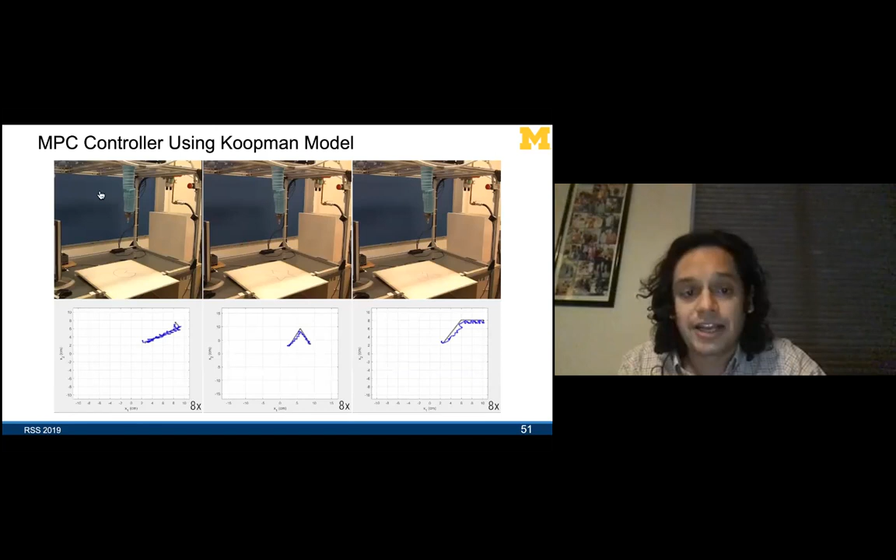So we've shown that we can do this. I'll skip ahead here and just show the videos. This is us applying an MPC controller to try and do tracking of a particular trajectory. This is all running in real time, and this is us trying to track this particular trajectory of the system.

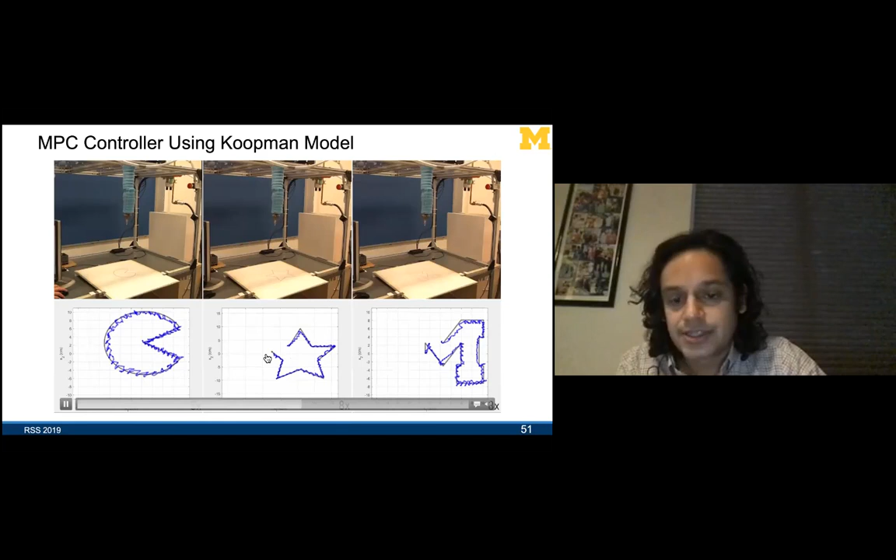And this is kind of cool. Again, doing this type of control is really challenging with these robots. I'll show you what other methods have been able to do in comparison.

I draw these gray lines here. It turns out that we have not very precise control of the actuators here, just because of the way pressure regulators work. You can actually measure the actuation precision of these pressure regulators, and this MPC controller is within the precision limits of what this actuator is capable of commanding.

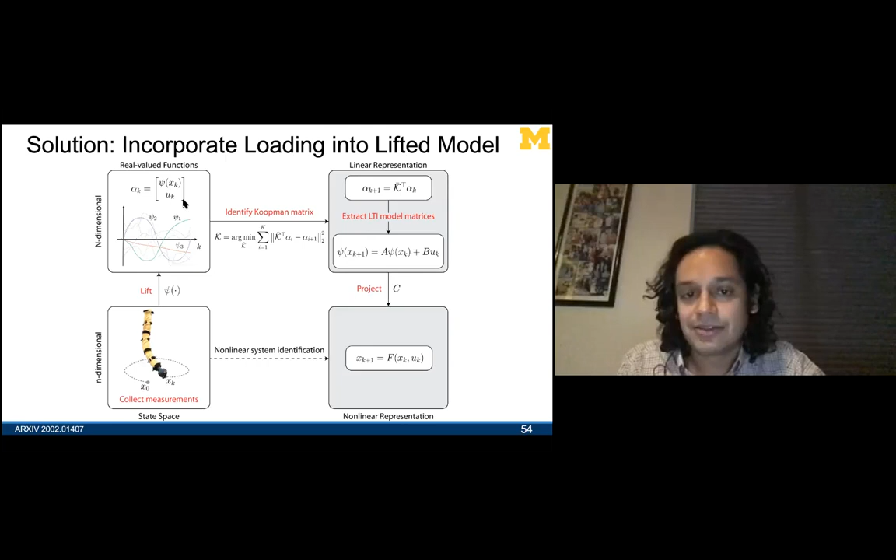We've actually been able to extend it to doing more complicated things like pick and place tasks with these soft robots. In that instance, we're lifting something slightly different than what I described earlier, which is we're also lifting the weight of the system. We can do a Luenberger style weight estimation on the lifted space in a nice way.

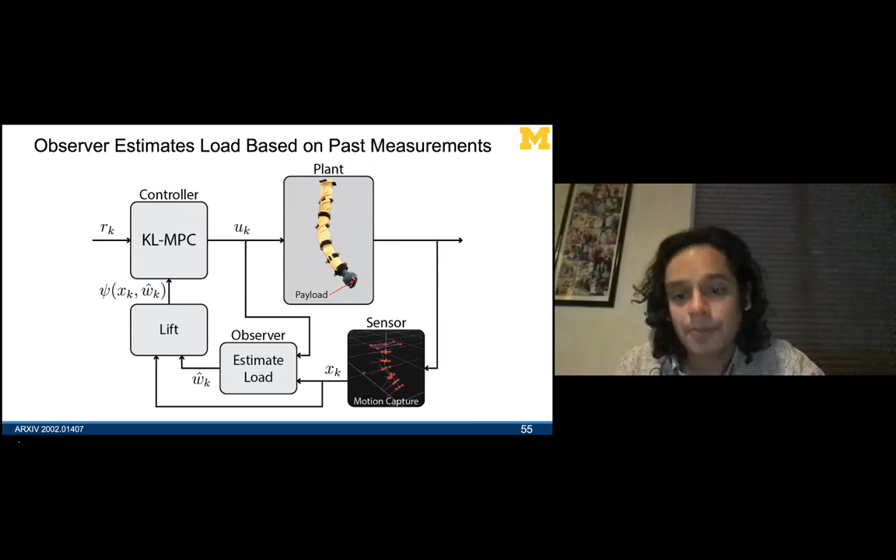You can find the details down here. But in practice, that allows us to do things like determining the weight of an object down here at the bottom by basically moving the robot around, and that allows us to do precise pick and place.

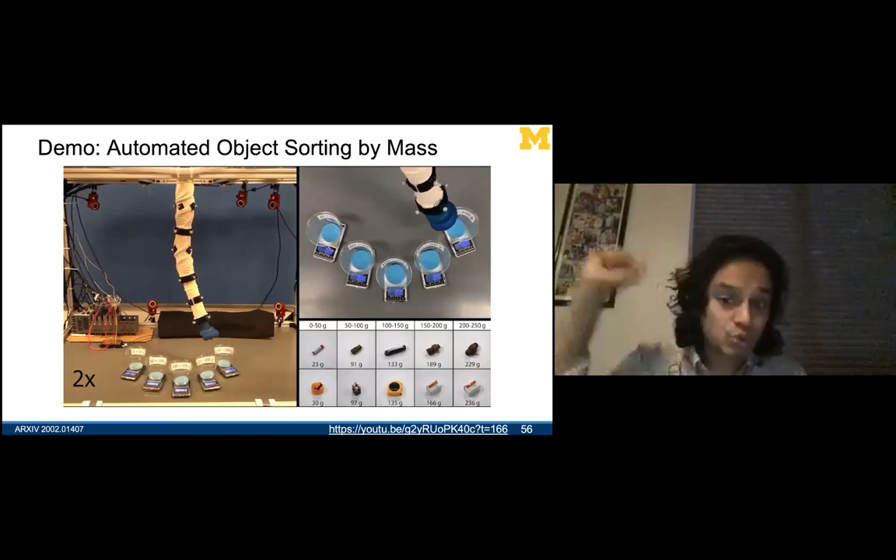We're working on more complicated things, like being able to throw accurately and whatnot. So keep an eye out — we'll hopefully have something to show in the next few months on that front as well.

That's sort of all for this section. I'll skip ahead here so people can see it doing all sorts of stuff. It's able to precisely figure out what it thinks the weight is, and we actually have some stuff in the paper showing it's converging to the correct weight, within 2 or 3 grams in this instance.